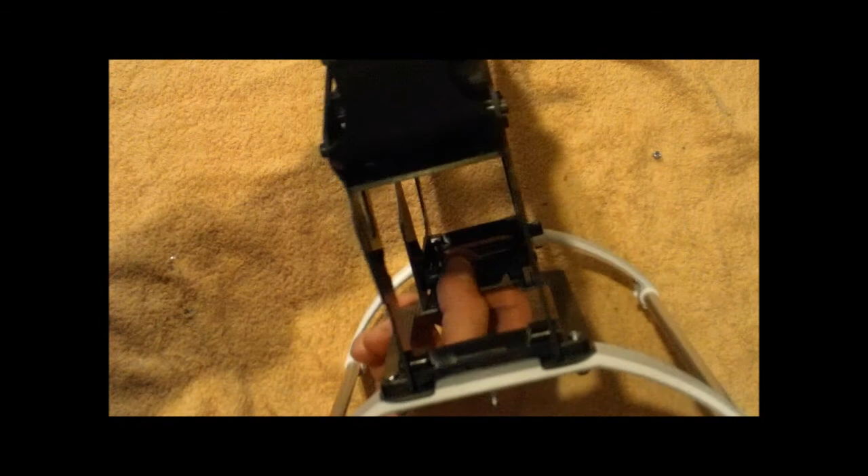Okay, now we've got this middle mount part right here, and there's plenty of room in here to fit the batteries when we have to. This is nice and solid. We follow the manual, and the main part of the frame is just about ready to go.

So the next step, what we're going to do is move on to this step 3 bag here, which actually has your main gear and your auto tail gear. Let's see. Bust out scissors here.

So this looks like it's about ready to go. We're going to make sure we check it and everything is nice and smooth. Make sure that the Loctite is in here the way it's supposed to be, and make sure everything is compliant with the manual. But it looks like this auto rotation main gear setup is already pretty much taken care of.

What we're going to do next is, now we have all of the servo mount hardware right here. So we're going to get this stuff out, and we're going to start mounting the servos.

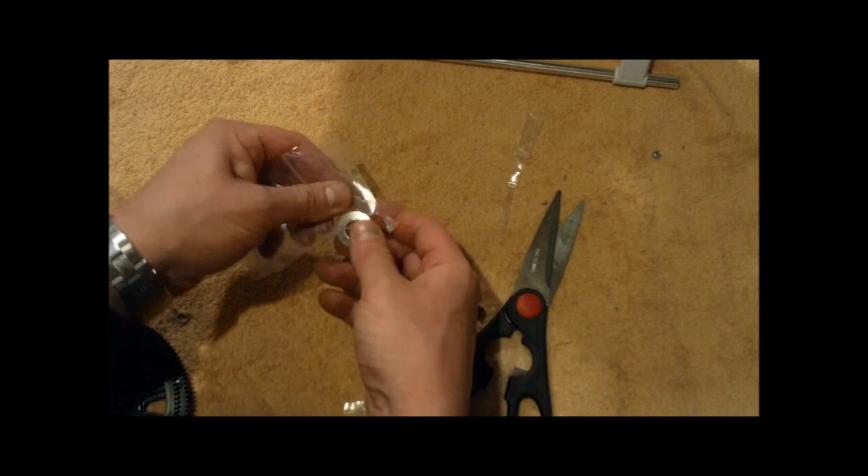This little collar here for the main shaft, we're going to put this to the side. Oddly enough, it's going to go in underneath the top bearing block instead of over the top, like what some of you might be used to. It's going to go underneath, kind of like a Compass helicopter, underneath the bearing. It'll give you more play with the swash plate. Get that handled.

So we're going to take our servos and make sure we just mount them according to the manual. We're going to use the previously mounted servo mounts that are on here, carbon fiber, little front plates, and we're driving into plastics, so we're going to just use a little bit of CA if we want. I'm going to opt out of using CA on these because we're using self-tapping screws. It's pretty good, we want a little bit of shock absorption in the servos. I'm not going to use the little metal inserts that go into the servos, I'm just going to use the little plastic parts that go in there.

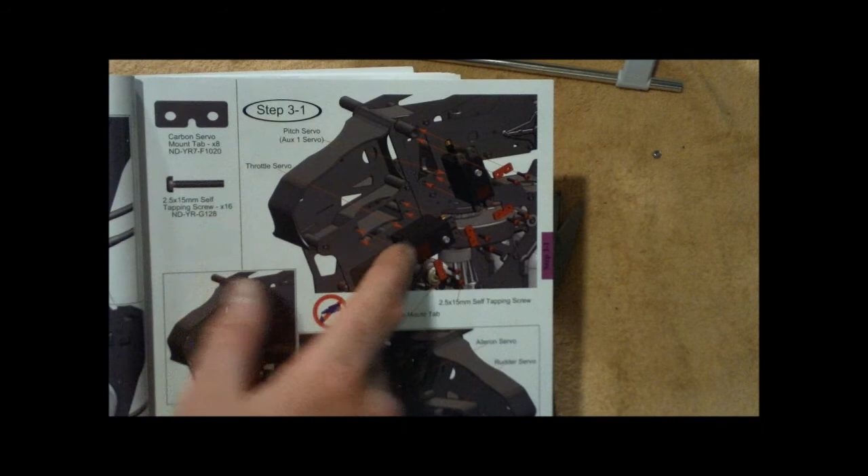We're going to make sure on the left side of the helicopter, both of the cyclic servos are facing upwards, but on the left side, this front servo is going to be facing towards the rear, while on the right side, the tail servo is going to be facing towards the front. So on the right side of the helicopter, we're going to make sure the rotating part of the servo is on the top for the cyclic, and on the front. On the left side, same thing with the cyclic, it's going to be on the top, but it's going to be on the back over here.

Actually, that's just for the nitro, so we're not going to have to worry about this. This is the throttle servo. We've got our elevator going to be back here, two cyclic, and then the tail servo here in the front. If you're running a nitro, this one you're going to want to make sure it's in the back, but we're not doing that.

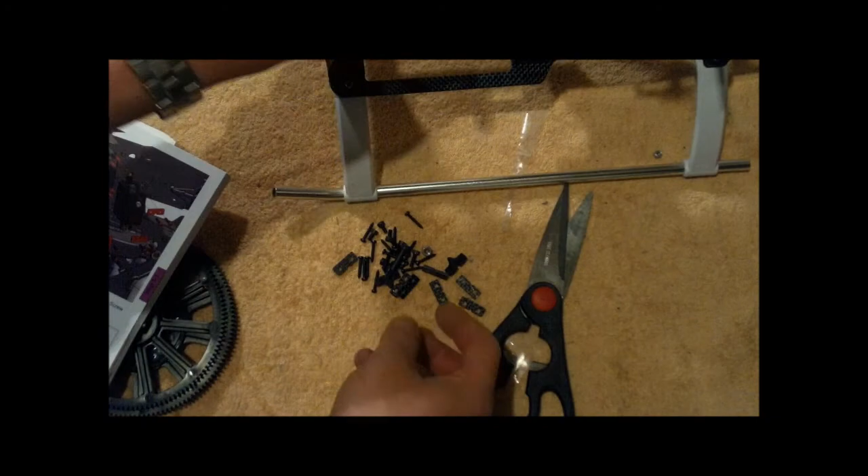We're just going to get those servos mounted here, and then we'll come back and look at those. We want to be geared towards running all the wires towards the front of the helicopter. And if you look at the manual for the elevator servo, we're going to put it back on the right side, and we're going to have the rotating part facing forward. So we'll come back and review once we get all the servos set up, and we'll get to setting up the one-way bearing after that.

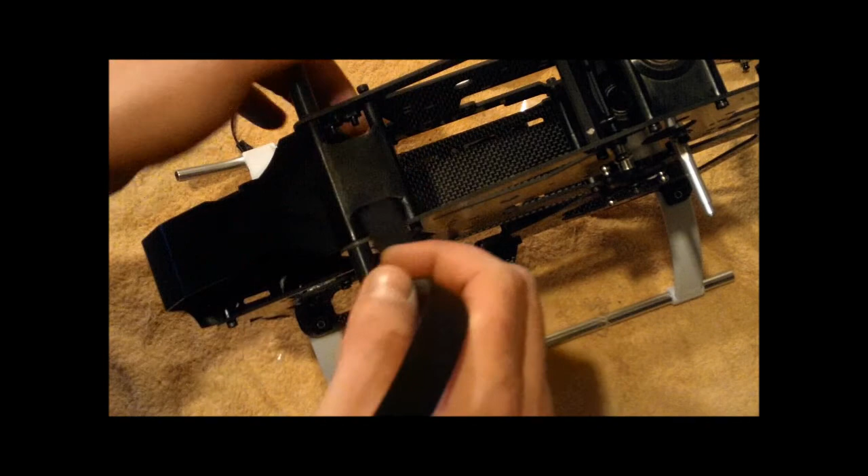Okay, now while we can, one thing we're going to do real quick is use one of the supplied straps and run it through this front part, because eventually when we have to put a gyro or receiver or whatever we're going to put on here, it's going to be a little bit harder to access it once we put the servos on. So we're just going to get this thing pulled back and set up right here so that we can have that set up for when we need it in the future.

Okay, now that we've got the servos mounted in here the way they're supposed to be. On the right side of the frame, again, cyclics are up, tail faces forward. Left side of the frame, there is no throttle servo because we're doing an electric, not a nitro. And the other cyclic is facing up again.

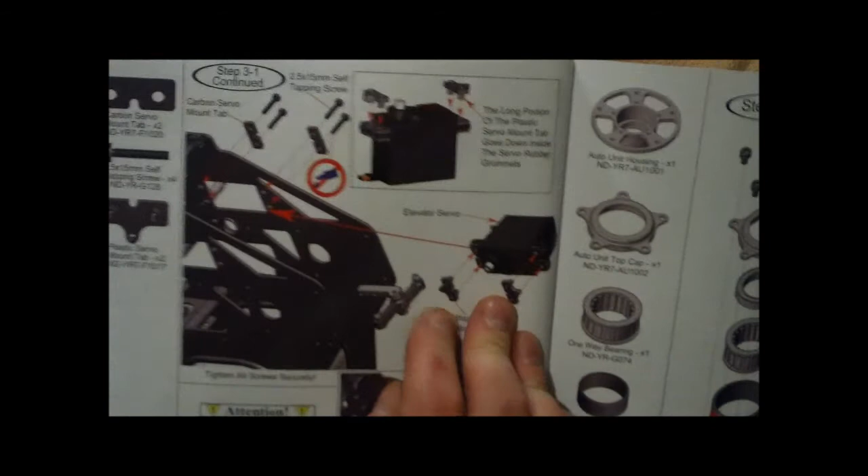For the elevator servo back here, you're going to use the plastic mount. This time the servo comes in from the inside, and you come in with the screws from the outside, but you're screwing into the long part of the plastic, which is going to end up going into the little rubber grommets inside the servo. As you can see here in the manual, it shows the long portion of the plastic servo mount tab goes down inside the servo rubber grommets.

So these little tabs inside the holes, the carbon fiber little frames are going to be coming in from the outside, servos in from the center of the frame, and make sure you have the rotation part facing forward. In the end, it looks like this - a little detailed view of how it's supposed to look.

Next part, I checked the main gear and the auto rotation. Everything was great. There was thread lock in here. All the bearings and everything was in there the way it's supposed to be. This part is ready to go out of the factory.

As they instructed in the manual, take this little Jesus bolt. This is a pretty nice thick little Jesus bolt. You need like a 3mm screw to get it in there, and we're getting this thing all ready to go.

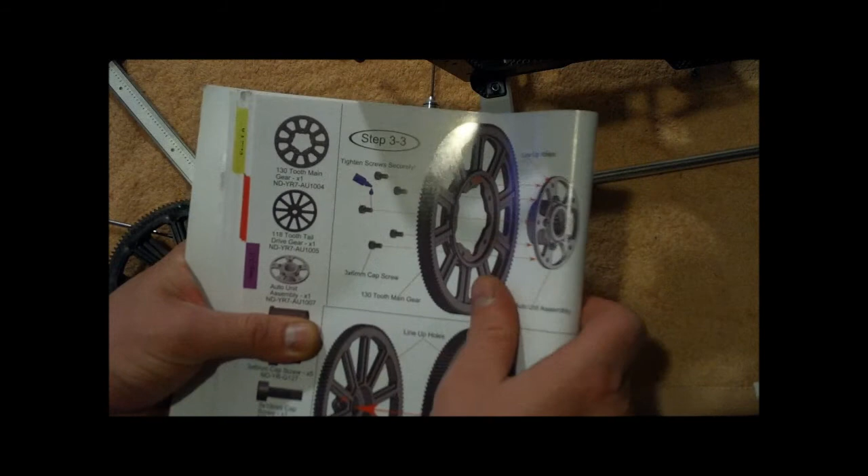Okay, one thing you want to make sure that you do with the main gear is get these 5 screws, the 3x6 cap screws, put into the main gear, and you want to make sure you're coming from the bottom and screwing into the top. You're putting thread lock and you're going through plastic, and then you're going to end metal to metal, so you're putting some blue thread lock on here.

A good way to access it, just the way you have it, you can line up these squares so that you have access to the holes right here. You want to just make sure you line them up, and in the end they're going to just come about flush with the top here, and it all moves nice and smooth.

In the next step, this part was already done by the factory. So we've got it set up like so up here. We're going to get ready to put it in here and put the main shaft down the top. What we're going to have to make sure we do is get the collar ready.

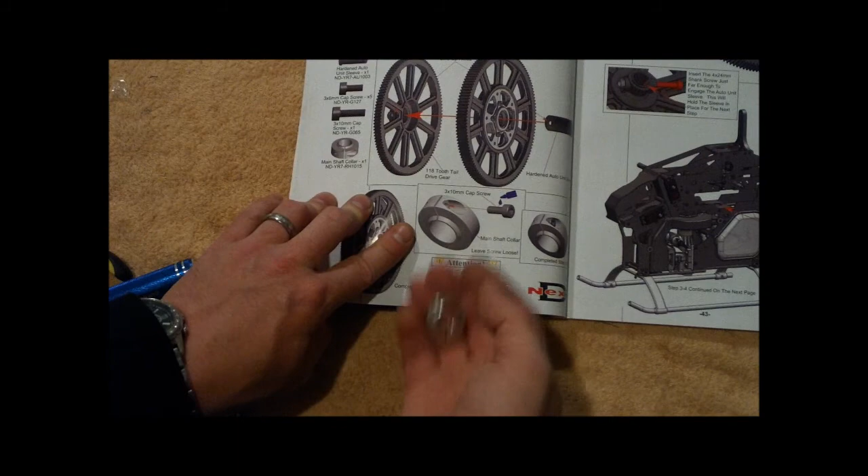Like I said earlier, this collar is going to go in from the bottom and come up from the third bearing, and we're going to make sure we have this 3x10 little cap screw holding that in place. Right now we're just going to leave it loose so we can slide it on the collar, but once we've got it ready, we're going to make sure we secure it here in the frame.

And once it's inside here, there's a little hole. What's great about these little Rave kits is there's holes that you can access everything you need to access. So when we tighten the collar screw, we're going to come in from this hole here. There's also on the main shaft, when you're coming in, there's a hole here, so you bring it with the 2 holes coming in, but then this lines up with this center hole, so you can put a little hex driver through it so it can hold it in place while you screw this bottom part. It's really nice and convenient.

There's even holes here on the elevator arms, see in the frame and the elevator arms, so that you can make sure you can put something in there and hold it in place to make sure that you're measuring everything correctly. So these holes definitely help with getting everything lined up the way you want it to be lined up.

So now that we've got the main gear ready to go and the auto rotation, we're going to put the main shaft in there, and we're going to line up the holes.

We're going to make sure the collar is in here, and the indentation, the raised part of the collar, is going to go up towards the bearing. Usually if there's an indent on something like this, that's going to go towards the bearing. With this kit, it's going to go towards the bearing, so it can only equal the size of the smaller bearing, not the larger bearing, and when it spins around, it spins freely.

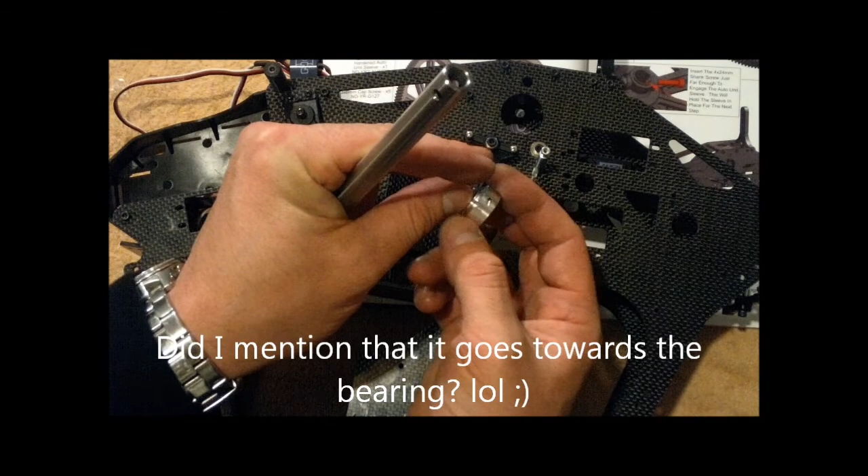So we're going to follow the manual here. Make sure we slide the main shaft down the way it recommends, with the holes facing down. Line up the holes with this hole inside the frame, and then we'll use a hex driver to hold it in place while we screw the Jesus bolt on the bottom.

Then we'll have the main shaft sticking out with the main gear and everything, and it should be all set to go. Make sure you don't forget the collar. This collar goes on the inside. You're going to hold the collar in there, slide the main shaft down through the collar, in through the bottom bearing block.

We'll get the Jesus bolt solidified, then hold the collar up while we're pushing the main shaft down, and tighten it through the hole on the frame. Make sure you look at the recommendations in the manual and do exactly what it says, and you'll be good to go.

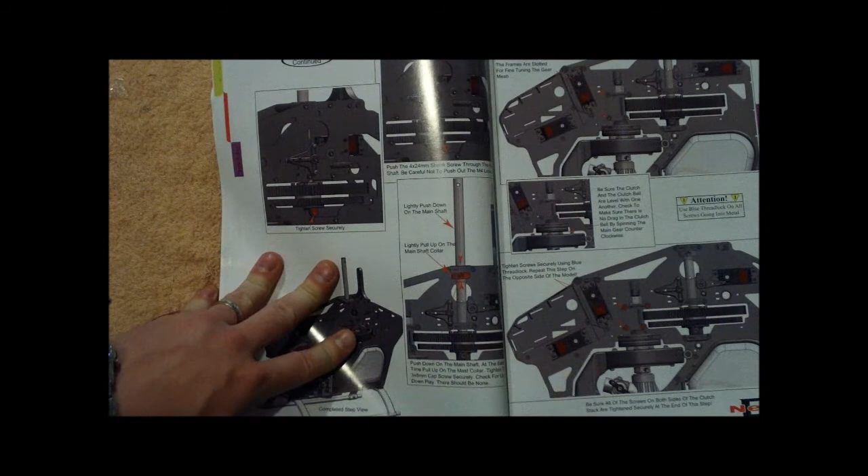Now we're ready to put it into the main frame with the shaft coming through. Make sure again you put the collar in there, and that you're coming through the top third bearing, then the collar, then the second bearing, then through this main gear, and then the final bearing.

Then we're going to screw the Jesus bolt through here, and make sure we can get this little washer nut to stay in place, because when we screw through with the Jesus bolt, we might knock it out of place. So once you get it through a little bit, hold it and then screw it in and get it nice and firm.

Don't over tighten it, and you don't want to warp it. Then you might find there's a little bit of up and down play here. The whole system, once you have it on the shaft, shouldn't be moving up and down, but in the main gear you might find just a little bit of up and down play. That's normal, don't worry about it—it shouldn't be a problem.

See how just that little shaft in there moves just a little bit, but not too bad.

Okay, here we go, finished product. We've got the servos in, we've got the main gear here, and it's moving nice and smooth.

There's a little bit of up and down play here, like I told you, but that's nothing to worry about. We've got the Jesus bolt through. Once we get the Jesus bolt through, we push down on the top. See, what I did was push down here, look from the back, and then with my finger in this hole I held the collar up.

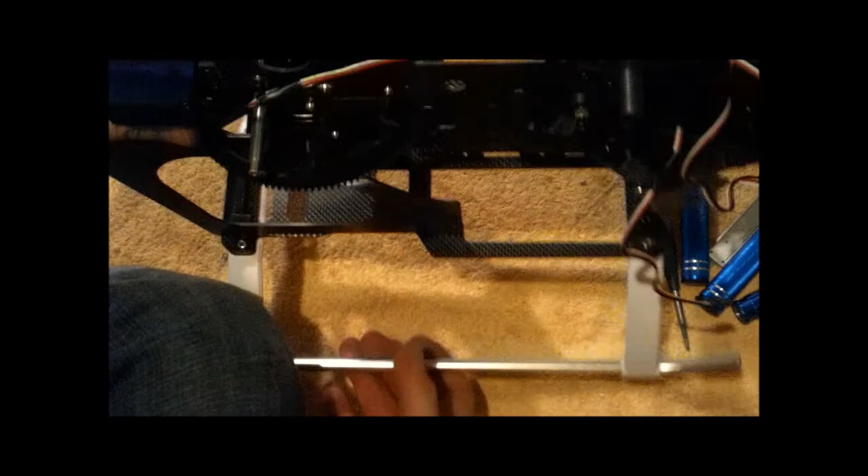So there we go, we've got the main frame with the main shaft and the main gear and all the servos, and we're ready to move on to the next step here on the electric build of the Rave ENV.

Okay, the next step we're going to move on to here is bag—it says step 4. It's got the swash plate, and you can set it up either in the 120 degree CCPM swash plate or the 140. I'm going to use the 120 myself, so make sure you set it up the way it says.

We've got the smaller ball links here on the ends, and then we've got the one here that's got another anti-rotation ball sticking out.

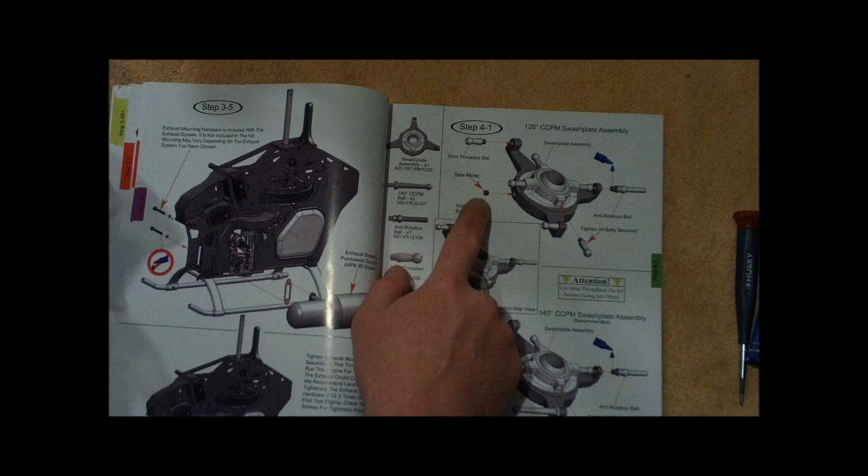There's also these little grub screws that come with the bag. You don't want to tighten them too much. They're meant for if you get a bunch of play in your swash plate or your ball in there, but with a new one you shouldn't have a lot of play. You just get it in there and get it snug. You don't want it too tight, or you'll kill the play or smoothness in the swash plate.

So make sure you follow whichever setup you're going to go with, and remember, read this note about the grub screw, so that you do not fly with the set screw too tight on the swash plate. We're going to go back, put thread lock on these and get the swash plate ready to go, and then we'll come back and show you what we've got.

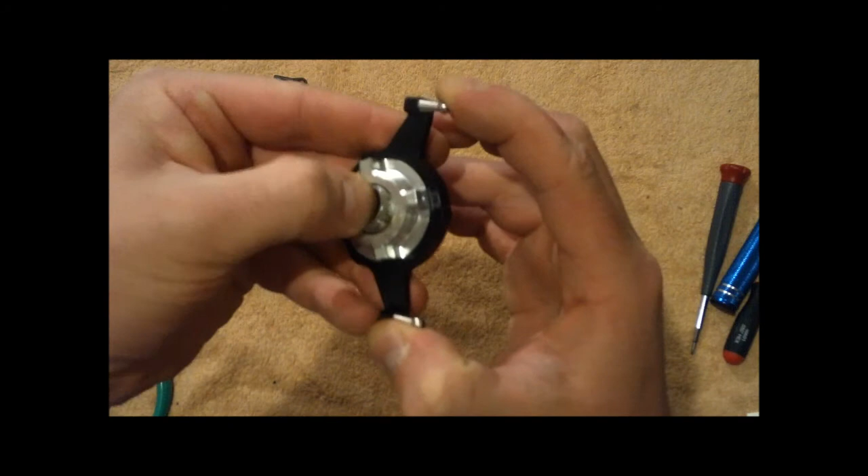Now we've got the swash plate finished and ready to go. Blue thread lock. Got the small ones on there because we're doing the 120 ccpm. I opened up this bearing a little bit and put some extra tri-flow inside there, to make sure it's moving nice and smooth. Grub screws just in there lightly, with a little blue thread lock, and just get them nice and loose. There's no play in here, so there's no reason to tighten them. If you ever tighten them, you're going to get into trouble.

Next thing it says to do in the manual is to get this ball link, this linkage rod, ready to go. I'm going to make sure I follow the directions here and get it so that the gap in between is 48 millimeters and it's 90 millimeters between the holes. I notice there's a right angle turn, and there's a certain way that the ball linkage rods clip onto the ball links. There's a little dot here, as you'll see on the inside of the ball link. You probably can't see this one, but right here, a little raised and embossed dot, and that's going to be the part that goes inside.

So we're going to create this one, measure it to length, and put it on the anti-rotation bracket part of the linkage rod. A good way to get this done is to just thread it in there a little bit, get it started. Your ball link pliers are pretty good for holding it in place. Get the second one on here. These fit on pretty nice. And then this little tool, if you've got it, is a great little thing for helping you put the linkage rods together. So just doing this until I get it to the size that I want it to be, and then I'm going to put it on this as it says in the manual, and then we'll come back and update and put this onto the main shaft and show you what it looks like when we're all set.

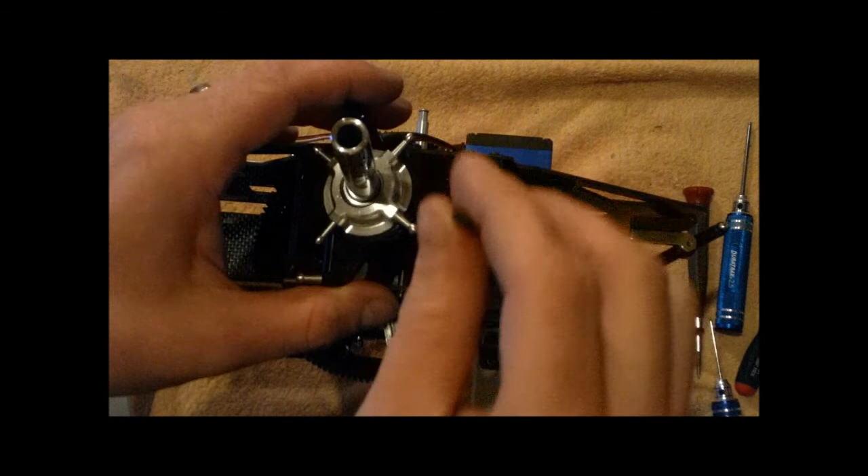Okay, now we have the swash plate done, and we put it in here inside the anti-rotation bracket. We've got this linkage rod measured to size. We're not going to put it in yet because I notice moving up and down here it's a little rough moving inside the anti-rotation bracket. So I'm going to take the bracket off, and I'm going to sand down in here. Make sure you use a nice straight flat sander so that you get it nice and straight. You might be able to just kind of work it up and down to get it to move smooth enough for you, but that's not smooth enough for me.

You don't want to create any play, but you want to sand it enough so it's moving up and down nice and smooth. For mine, towards the top, it's better, but once it gets towards the bottom, it kind of clamps down on there and it snags. So I'm going to take this anti-rotation bracket off here and sand this down a little bit so it's a little smoother. But before we put the swash plate on here, I made sure I lubed up the main shaft, and that moves nice and smooth on there by itself. So we're going to come back after we sand this thing down.

If you do it on the frame, you'll probably get fibers all over. I don't want to do that, so I'm going to just loosen up these screws, pull the whole thing off, and then sand in there. Again, make sure you use a nice straight flat sander and you don't over sand. You just want to make it so that the anti-rotation shaft is moving inside the guide nice and smooth.

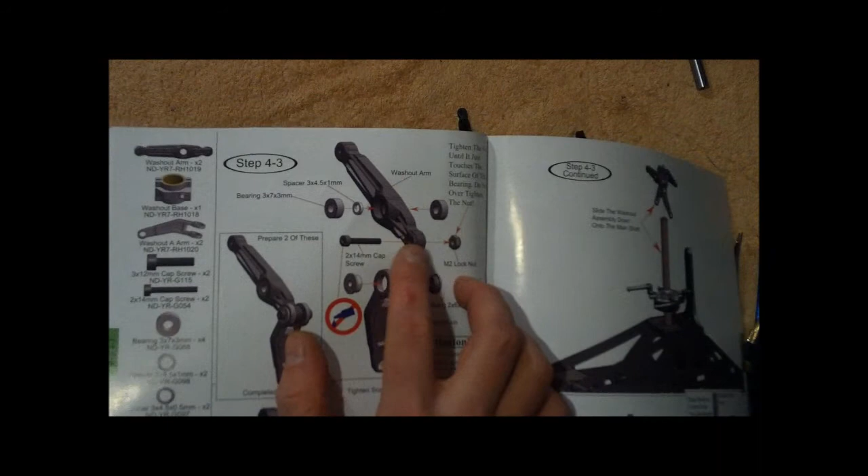So basically what we're doing is this part up here, as you can see, we're going to start putting this bearing into this arm, then the spacer, then the other bearing, then we'll have that one ready to go, and then we'll put the flanges on this little part, and then put that on here, and then start screwing this 2x14 millimeter screw in here, and then we're going to tighten it into this nut right here. But we don't want to over tighten it. We just want to tighten it until it's just about flush and that everything is moving nice and smooth. And it's going into one of the nuts where you don't need to secure it with thread lock, so no thread lock in this.

In the end, we want it to look just like this. I say just line everything up the way it looks here, and just set it up with the same perspective as it is in the manual. So you'll see there's like a flat side here in the manual. You see the left side, which is this part, longer edge out, shorter edge from the center here.

Gonna do just like it says. Put the bearing in there, then get the spacer worked in there. Make sure it's in there properly. And then this other bearing. That part's set.

Put the little flange bearings on this, and then just like in the manual, this part's going to be dipping down to the right while this is faced up this way. Put it on here, and we're going to screw it on with the nut, and in the end you want to make sure it's moving nice and smooth. You're going to end up putting together 2 of these.

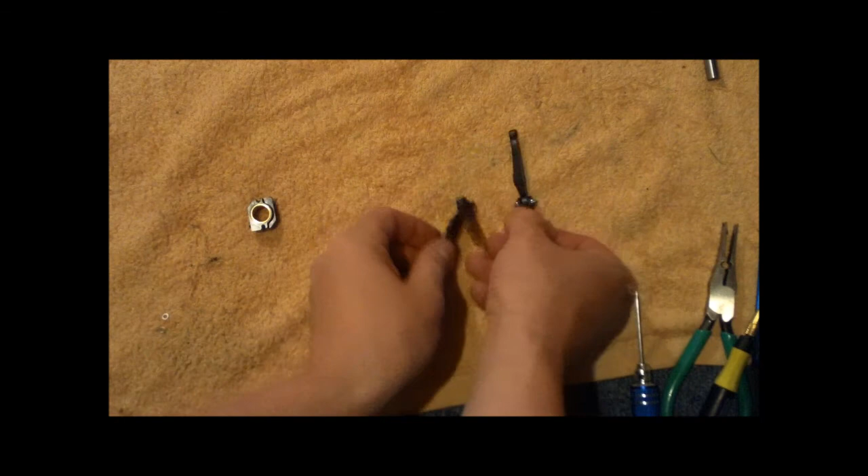Okay, moving on, now that we have both of these mixing arms ready to go, and they're moving nice and smooth, just the way we want, didn't over tighten that, we're going to grab the washout base here. If you're having a hard time finding it, my washout base was actually already on the head unit here.

Pull that off there. You'll notice this thing isn't symmetrical. At first glance it may look like it, but there's actually one spot where there's more space here than there is up at the top. So the more length is actually on the bottom.

What you want to do is, just like previously, line it up just the same way it looks in the manual. Have this facing here, and then the mixing arm is going to be facing just the way you set it up. There's also this little spacer, don't forget it, the 3 by 4.5 by 0.5. There were 4 of them in my kit, so make sure you grab that, and the 3 by 12 cap screw, and you're going to use thread lock because you're going metal into metal.

So we've got our screws and our little spacers. We're going to hold it right here like this, and make sure the length of your part is on the bottom. Thread lock on the end of this, make sure you don't get any thread lock in the bearings, just get it in the threads nice and smooth, then through the spacer, through the mixing arm, and into the washout base. Do that on both sides, and then we'll come back and put the washout base onto the frame.

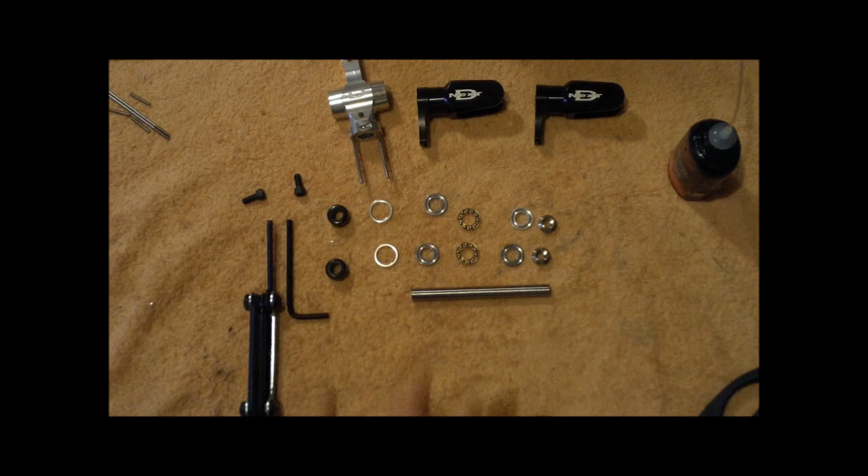Okay, moving on to the next part, we're going to start building the head block and this whole setup. You're going to need a couple of really big 5mm hex wrenches, and then pull out these 2 big thick 5 by I believe 12mm screws, your head block, your 2 head grips, and all your thrust bearings, dampeners.

What you want to make sure you do, I just like to line it up in the order that it's going to be going in there. We've got here the dampeners. These are going to go inside the head block, and you want to make sure that the part that goes inside is the part that doesn't have the embossed raised edge, because there's one side that's a little bit raised, and then the other side isn't. You want to make sure the raised part is facing the outside, just like it says here in the manual.

So we've got the dampener, we've got this large inner diameter little washer, and what you want to do is with these ball races, there's going to be 2 of them that have a larger inner diameter. You can see when you put it on the feathering shaft that there's a lot more play. That one's going to go on the inside, okay?

And then this other one with the smaller inner diameter, you can see when you put it on here, there's barely any play at all. That one goes towards the outside. So larger inner diameter is going to go on the inside. Make sure the curved part, the ball race, is facing the outside towards where the bearings are.

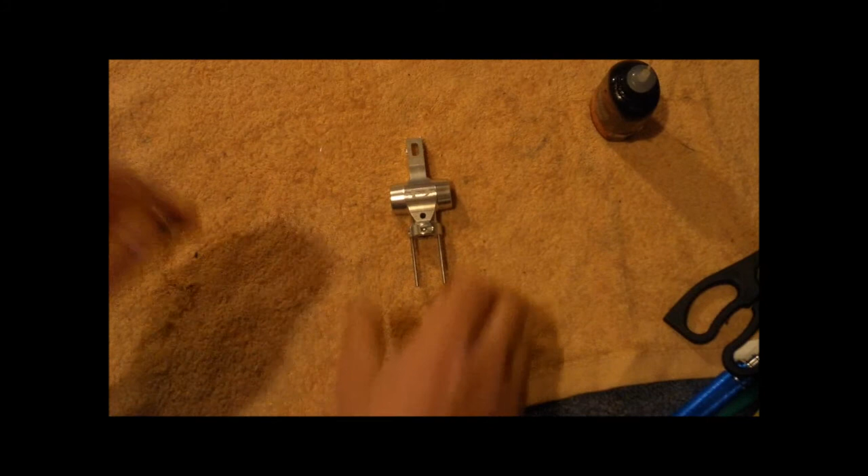Another little tip on the head block, just make sure you put the dampeners in there first. I tried kind of lining it up and then putting it in as I'd put the heads in, but they weren't going in the way they should, so just get the dampeners in there nice and tight first. Make sure that it's flush, and again, make sure that the grommet part that sticks out is towards the outside.

And there's also this little washer here that you're going to want to make sure that you put between the dampener and the grips. So once you've got one side ready to go, just make sure you put the dampener on, or this spacer in here, and then put a little tri-flow on the end when you run it in. Run this end through. It's going to take a second here.

See, this is going to come through. The dampener on the other side is going to probably want to come out, so make sure you push this down, get it all the way through, then push the dampener down, and make sure you get this other little spacer on before you start putting the second head grip on the head.

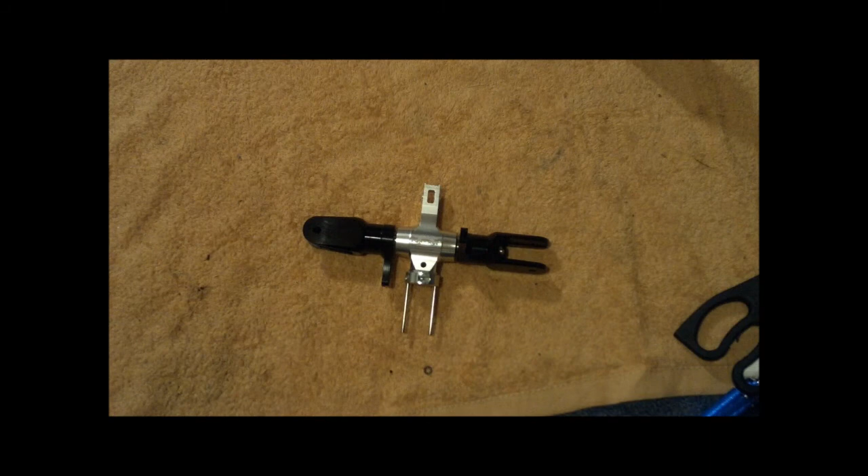We cranked in both sides really tight, and we want to make sure we don't forget the bearing in here in between the grips, the washer spacer in between the grips, the bearings inside here, the large inner diameter ball races, and then the little step washer here, and the 5mm hex screw. Just make sure you're following exactly what it says here, and you've got the correct order.

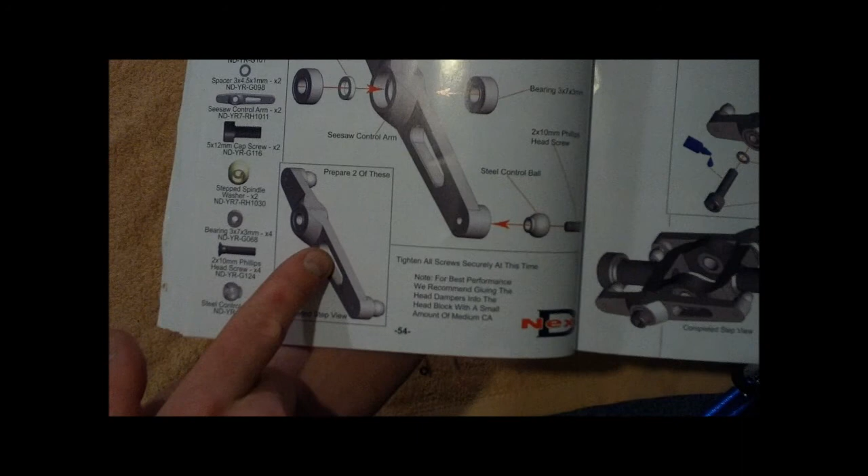So now we're going to move on to the metal mixing arms. We're going to get these set up. There's another one of these little spacers here that we're going to put in with the bearings, short arm, longer arm. We're going to make sure that we screw the balls on the part that is protruding, because there's one side that's flat and one side that has the protruding parts, and get this thing ready so we can start getting the flybar and all that stuff ready to go.

Okay, for this flybar seesaw assembly, this part is already pretty much done for you. It's already set up, most of this page 54 and 55 is done. I checked, this has thread lock. I pulled mine out, put some more thread lock on them, but out of the factory they're already ready to go. The washer, the spacer, the washer, all the bearings were in place the way they were supposed to be. All I really had to do was put on the balls for the ball links.

So I just make sure I put those on the correct side, open this up, make sure they're facing towards the inside, and the rest of it is already ready to go, nice and smooth, and the seesaw is all set. So we're going to move on to the next step in the manual.

Okay, next step here, we're going to put this seesaw for the flybar onto the head block. We're going to make sure we line it up the way it is looking here. I'm not going to put these blade screws in here yet, I'm going to just put those to the side. I don't really need to put those in there yet.

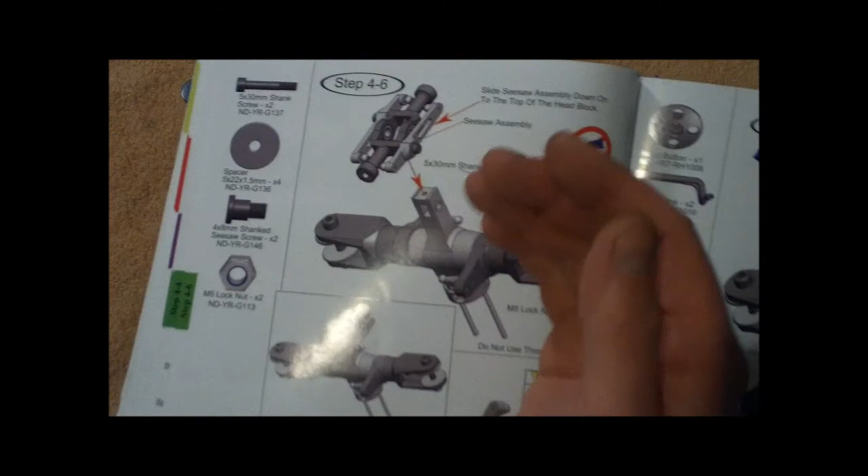We're going to make sure, see how we've got the shorter part of the arm down here, longer part out here, and it's the side where the screw-in is towards you. The rest of it's basically symmetrical, so which side is on top doesn't really matter.

We're going to pull out these two little screws here, these shank seesaw screws, and we're going to apply red thread lock onto those, the really tight type 22 stuff. So make sure we get out these two screws here, and you've got your type 22, and we're going to put that on there.

Make sure when you set it up, just make it look the way it looks in the manual, and put the seesaw on here, line up the holes, and then run these in. You're going to end up screwing these into these little tapped metal pieces right here, and that's going to be on there nice and tight, it's not going anywhere. Just make sure you don't get any of the thread lock inside any of the bearings you're going to be screwing into. So we'll come back and look at that once we've got the seesaw on the head.

Okay, now we've got the seesaw on there. It's again moving nice and smooth. Everything's nice and smooth the way you want it.

Last part for the head is to get the button head on here. I've got a 3x8 screw that's thread locked and ready to go, since we're going metal into metal, and it only fits one way. Make sure you line it up instead of trying to tighten it at an angle, or it will be difficult. It's keyed, so it only goes on one way. Then we'll screw that on the top and start moving on to the rest of the Flybar setup.

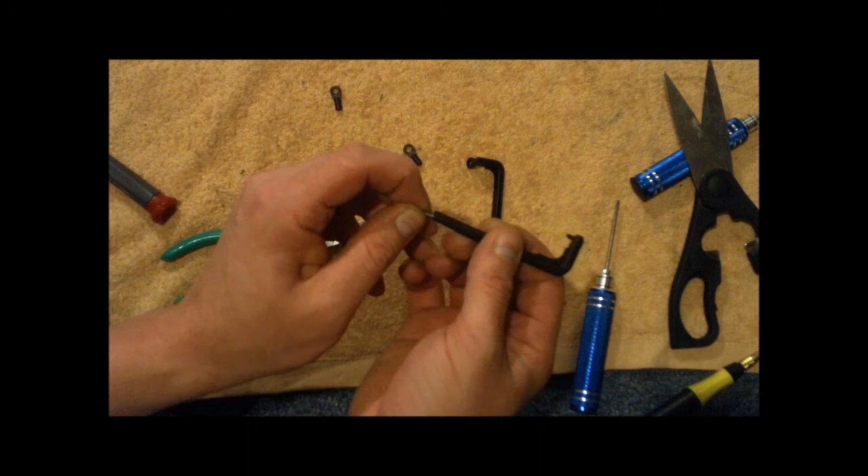Now for the next part we're going to put together these Flybar links. You have to be extra careful here, taking it easy and doing it correctly. It's going to be a bit of a pain getting this little screw inside here - there's a little hole in there. Most of it plays around, but you have to line it up with the hole and put on a lot of pressure to push it on there. Make sure you get this all the way to the bottom of this part first before putting on the small ball link on the end.

If you try to put it on the link and then screw it on, chances are you'll screw too far into the link and break it. So make sure you don't do that. Screw all the way in here. What I did was use the ball link pliers, hold the little end part on there, and push and twist until it finally went on.

By the time you have it ready for the small ball link, just a little bit of thread should be sticking out the top. That's how you want it. Then start screwing it in there, and the end of the ball link will start screwing inside here. Make sure you get this all the way in before putting the ball link on, or you'll ruin the ball link.

Bring out your calipers and make sure the whole thing is 90 millimeters, or 81.5 between the center holes of the ball links. Make sure it's facing the right direction. Then we're just going to put a steel control ball on here so later we can screw it onto the rest of the head assembly. We'll come back once we've got these Flybar arms ready to go.

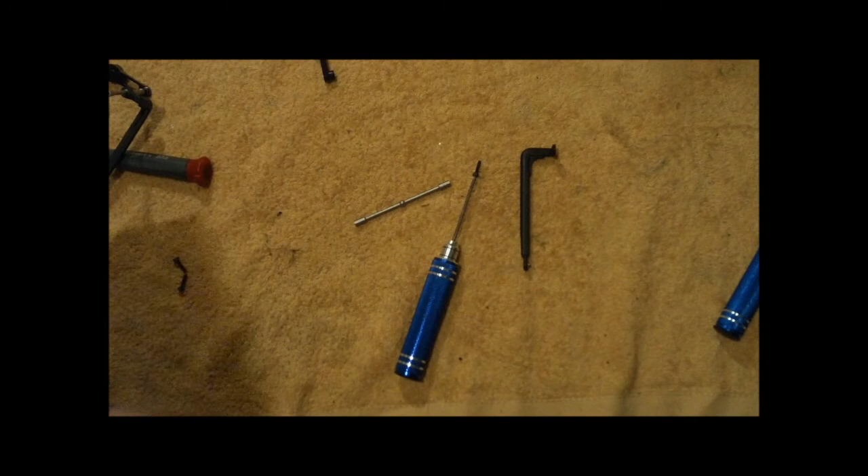Okay, next step, we're going to get these Flybar link assemblies and the Flybar cage balls all set up to put together the Flybar cage. We're going to put the Flybar links on, making sure the protruding part of the L goes in a certain direction - there are little fibers on the back part, and the front part is the way you slide it onto the Flybar cage ball rod. Make sure you slide it on correctly, like this, and then we'll start screwing in the other parts of the cage with these 2.5 by 10 screws.

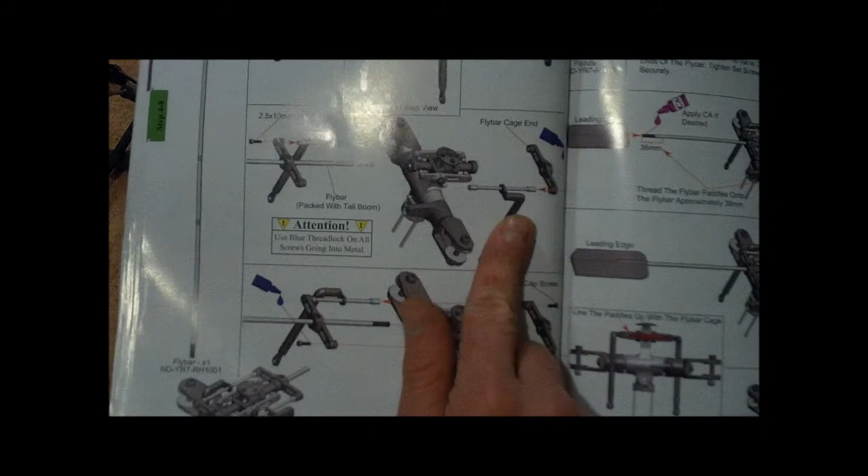It's actually a 2.5 millimeter by 10. I think 2 millimeters is the hex driver that you're using to screw in here. And we're going to make this little L part right here. Once we make the little L and we've got it all set up correctly, we're going to make a second L, and then we're going to put them together with the Flybar and use the Flybar to guide it on, and then put the whole Flybar cage together.

So you want to make sure that you slide these on the correct way. This part coming in, just gonna get through this part here, and then you just want to snap it on here. This actually becomes a little bit easier. You can use your ball link pliers, and you can just snap it on here like this.

Okay, so once that's snapped on, you've got that looking good. And then you've got this part here. I've got this screw already pre-thread locked. You're going metal into metal, so again, put thread lock in it. Put that in here, and we're going to screw it into the side that has the link towards it.

So back here, we're just going to make this little L shape, and then once we screw that on there, we're going to have this full L, and then we're going to make a second one and start putting them in the Flybar cage. So I'm going to get this one done, finish up the second L, and get the rest of it ready to put on the head block. And make sure that you don't forget to use the thread lock in here.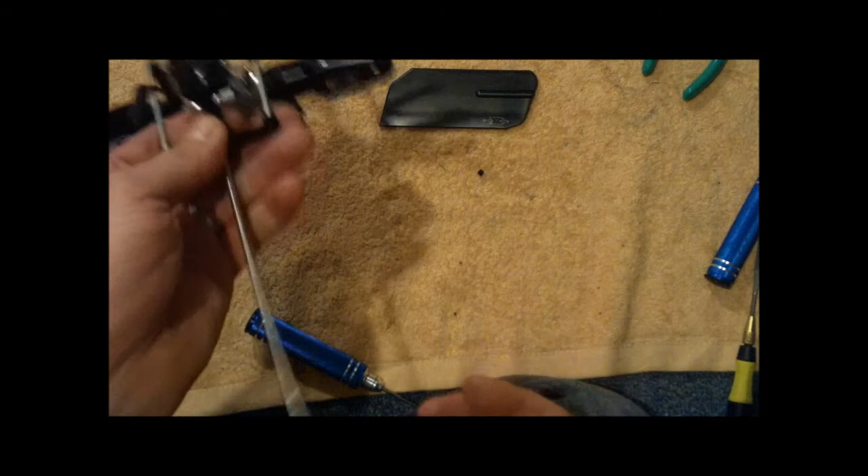And then once you've got the grub screws on and it's nice and tight, you start putting the Flybar paddles on. I made sure on the end, I just went and measured out 38 millimeters, and we're going to put the Flybar paddle onto the rod about that far. So I put just a little mark. You can put tape on there and then take that off, or if you don't mind putting a little mark on there. And as I started threading it in, I'm going to put a little bit of CA just on the last couple threads.

And then tighten that whole thing, and then make sure that the distance here is equal to the distance here. They have to be equal, and then you want to measure them out so that they're level with the cage. So we'll put the second Flybar on here and measure everything out, make sure it's level with the cage, and then come back and update and show you how everything looks when it's about ready to go onto the frame.

Now we've got the flybar paddles on here as we wanted them. This measures exactly the same length as on the other side, and you can use a pitch gauge if you need assistance, but you just want to make sure the paddle ends up level with the cage on both sides. The leading edge is going to go clockwise, so make sure the leading edge is facing the correct direction. Just make sure it matches up with what it says in the manual. So this is all good.

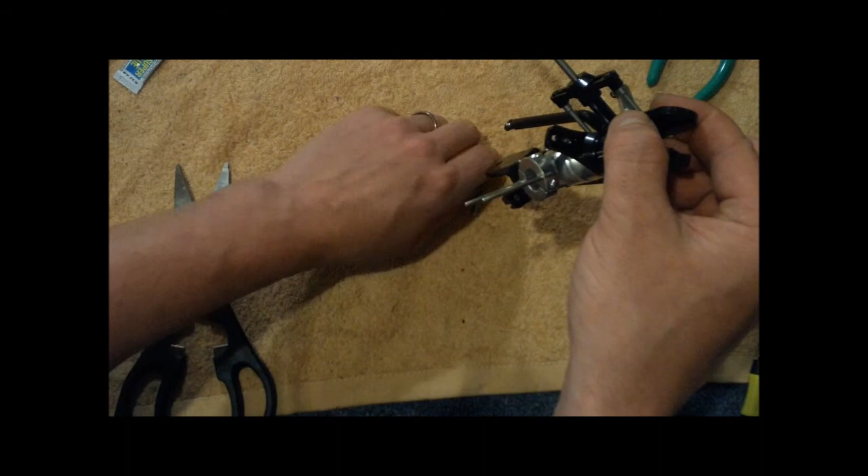One little thing about these grip ball links: it doesn't screw directly into the grip like it looks like in the manual. It's actually these little black nuts that come with the whole kit. You're going to screw it in here, and slide the nut in - there's a little slot on the grip. Slide the nut in there and pull that back. Make sure you put thread lock on there, then twist it in, and use some needle nose pliers or something to tighten it, and you'll have it all set.

Now we're going to put the head onto the main frame part. First we got to make sure we've got our Jesus bolt, and our little 3x10s that we're going to use to put on the collar - that will go on these parts. The Jesus bolt's going to come through here, and then we've got these little 2x10 millimeter screws with M2 washers. We're going to use those to put these little flybar ball links onto the mixing arms. So first we want to make sure we line up the holes.

We got the hole here on the head block, and we're going to line that up with the hole on the main shaft. Then we're going to take our Jesus bolt, put it through here - I'm just going to lift it a little, put it through - and we've got one of these nice little plastic washers, so we don't need any thread lock. We're going to put that in there. Right now I'm just going to finger tighten it. When I cut, I'm going to tighten that a little more with a wrench and get it hand tight.

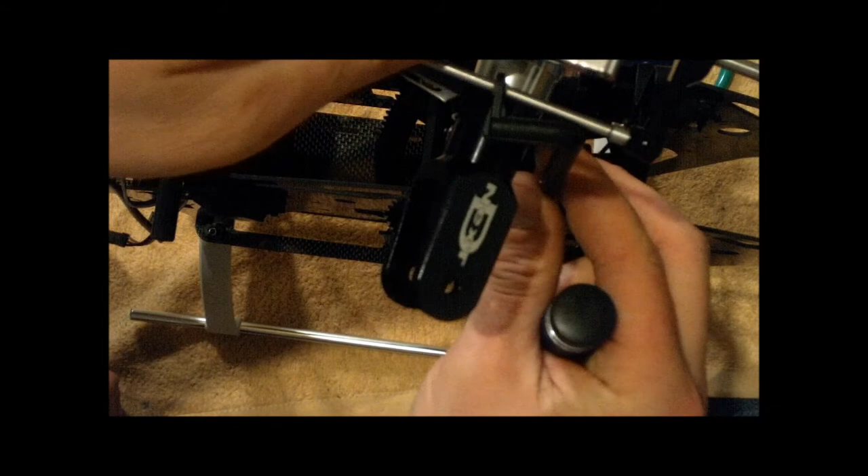I'm not going to do that right now. It's long enough, you don't want to over tighten it. You want to make sure you get it nice and snug. Don't over tighten anything into plastic, or it'll be too much. Then do the same thing on the second arm, or ball link arm, for the seesaw cage. Once we've got those tightened, we can come in here and tighten the Jesus bolt, and then tighten those.

3x10mm screws that are going into the collar of the head block. We'll come and review after we've got those parts finished up. So there we have it - the head block is now securely fastened onto the rest of the head and the frame.

The phasing pins and the washout base are matching up perfectly. The swash plate moves smooth through the whole thing. All the grips move smooth.

We've got this last little bit - these collar screws in here. Make sure you tighten them evenly, kind of go to one, tighten a little bit, other one, tighten a little, go back and forth, make sure they're tightened nice and evenly. Jesus bolt is in here and screwed in, and the head is ready to go. Now we can start moving on to the tail, and we'll get the ball links finished up for the head a little bit later.

Okay, now the next section we're going to move on to is step 5. We're going to start putting the tail components together. So we're going to want to open this bag, get everything out, and let's open it up here and show you what all is inside.

Looks like we've got just about everything we need, and some of the stuff looks like it's already pre-done. So far everything that's been pre-done in the factory has been thread locked and perfect the way it should be. Here we've got zip ties, the frame brace, and the guides for the push rod. The tail block looks like that's already got the torque tube in it the way it should be. Stabilizer mount, the fin, blades, back torque tubes, all the gearing, tail pitch slider, control arm, the tail shaft and hub.

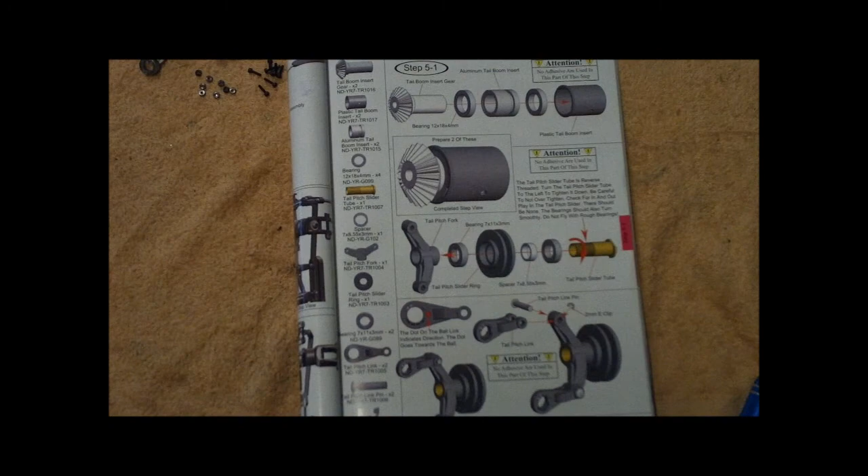Okay, now that we're moving on to setting up the tail, step 5 - over here, step 5.1, this whole page is already done for you out of the factory. These guys are already ready to go, they've got all the bearings and spacers and everything's in there the way it should be. Same with down here - they put together the tail pitch slider and everything you need, and it's all set to go out of the factory. It's got the thread lock where it needs it. Got this tail pitch slider all ready.

Gonna put that to the side, and we also have the torque tube components. Looks like these are symmetrical, so the one that goes in the front is the same as the one that goes in the back. So we're going to put that to the side. What we have here lined up is the rear tail hub and all of the different bearings and spacers and washers and nuts and bolts that we're going to be using to set this up.

The way we do this one is we're going to put everything on here on the end of the hub, and then put the nut on the end, and then take the grips and clamp them onto that whole assembly, and then screw those together. It's going to be like a little sandwich thing.

So here on the next page you can see it says all the details, just like on the main blade grip, except this time the bearings aren't preloaded into any grips. So you've got the bearing - make sure you've got the right spacer here, it's a little thicker than all the other ones, so it's easy to tell apart. 1 millimeter, it's like 7 by 10 by 1. Make sure you've got all the correct diameters - the larger inner diameter is the one that's going to go towards the inside.

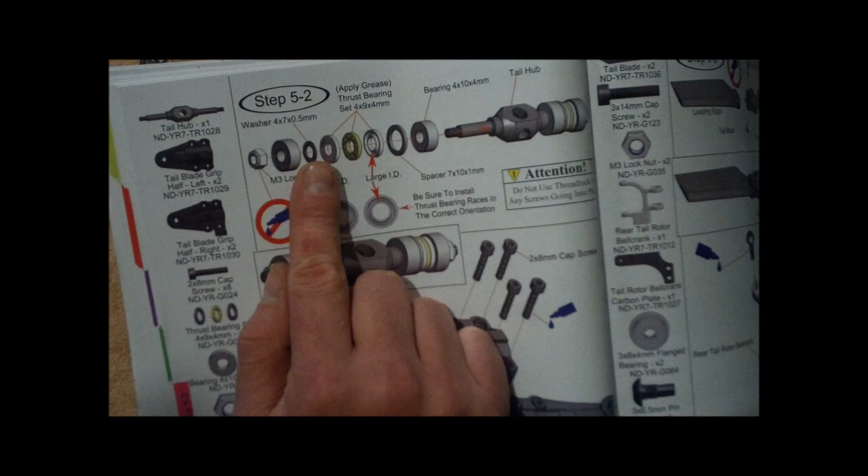Remember, just like we did with the main blade grip, put it on here and you'll see it's loose, where the one with the smaller inner diameter won't be as loose on the hub. So we've got the bearing, spacer, larger inner diameter. We're going to pack the bearings here with grease, small inner diameter, and then make sure you get the right washer here, the 4 by 7 by 0.5. There's a couple washers that look like they may be similar, so get out your calipers and measure the inner and outer diameter - make sure you've got the 4 by 7 and it's 0.5. Then a bearing, and then the washer.

So we've got 1, 2, 3, 4, 5, 6, 7, 8 components. Got it lined up here - 1, 2, 3, 4, 5, 6, 7, 8. So what I'm going to do is pack this bearing, double check, make sure that this is the one that's going to be going inside. See how it's a little bit loose?

This one is going to be towards the outside. See how it's not loose at all? And then again, the open face of the bearing is going to go towards the inside of the hub, because we're going to pack it with grease and we don't want the grease to fly out.

These nuts have got plastic in them, so you don't have to actually use any thread lock. We're going to get that set up, and then we'll come and put the blade grips on there.

Now we have this tail hub all set up and ready to go with all the bearings on it, everything's nice and smooth. We're going to separate. We've got these plastic blade grips, 8 little 2 by 8 millimeter screws, a bunch of these little black anodized hex bolts, 2 more ball links and 2 more little screws to get the ball links on here.

So what we're going to do is, you'll see 2 of them have little ends and 2 of them don't. Make sure you don't put the 2 with the same ends together. Basically you're just going to sandwich these together like so, and one side you can see holds the hex nuts, and then you put the hex nuts in there. Put some thread lock on here because they don't have plastic on them, so it's metal into metal. Thread lock on the bolts, and then all the way around.

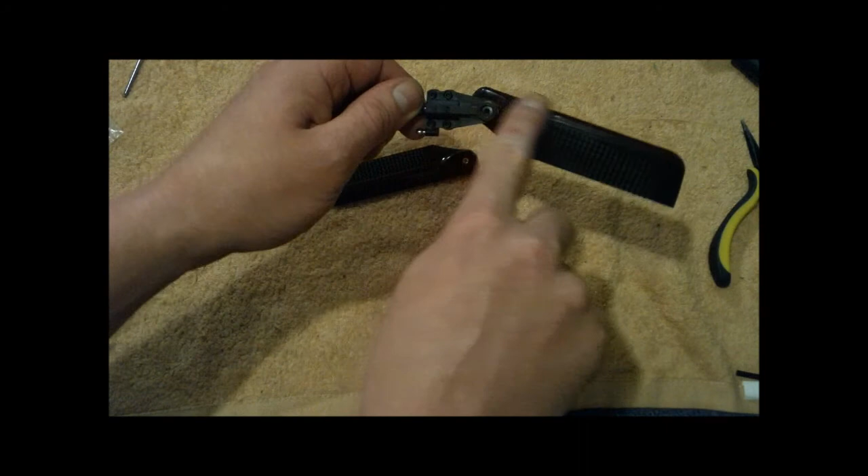Next we're going to put the blades on. Make sure that the leading edge of the blades is going to go on the side that's opposite of the ball links. So it's going to be facing this way, not this way. It's going to be spinning counterclockwise, so make sure the leading edge is going forward, and that the ball links will be following the leading edge, just like it says in the books.

So pull out these longer 3x14 screws and the M3 nuts. Again, you don't have to use thread lock on these ones because it's got the little plastic in there. Put the blade grips on there, and then you've got that whole section set up and ready to go.

Alright, next part we're going to move on to now is getting this little tail bell crank assembly put together. So make sure we pull out this part, the little carbon fiber tail rotor bell crank plate, and these flange bearings would already be in this little setup. This was screwed to something, but take it off what it's on. You're going to have to do that to put it together anyways.

These little pin screws here, there's going to be 2 of those. Make sure you get a couple of 3x8 cap screws. That's going to go in here and screw it together, and in the end it's going to look like this.

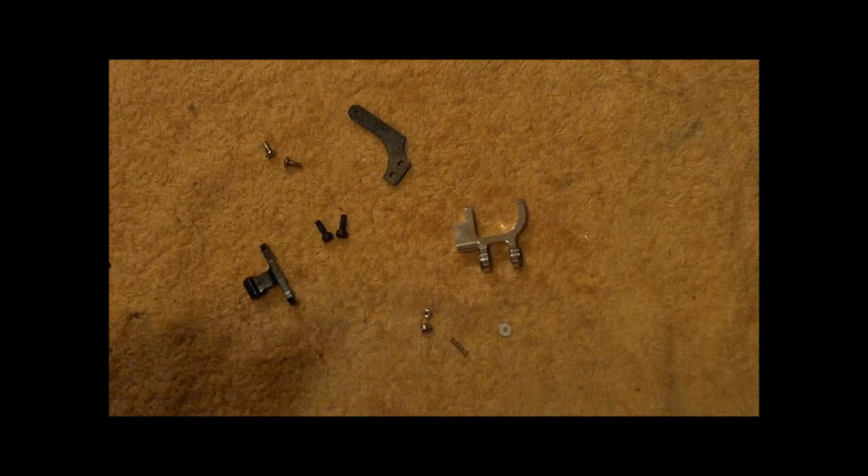So here you can see we've got all the little pieces that we need. We're going to have this little linkage ball here on the bottom, so make sure you set that up correctly. It's going to come through. We've got the hex nut. There's going to be the washer on the inside of that part, and the screw is going to go through there. So make sure you've got the hex nut, the ball link, the screw, and the washer.

This part was on it, and we removed it. We'll put that on there later. We've got this little carbon fiber arm, and these little 3x8 screws.

Anytime you're going into metal, make sure you use thread lock, and thread lock also on these little pin screws. The pin screws go in the top, and the carbon fiber plate comes down here. Just align it the same way that it's set up in the manual, like so, and then screw that together, and then put together the ball on the end there. We'll come back and update once we've got that part finished.

Okay, we've got this little tail bell crank all done and ready to go. We've got these pins sticking out here, got the ball on the end there. There's the washer in there, thread locked onto the nuts, and these guys in here holding it together.

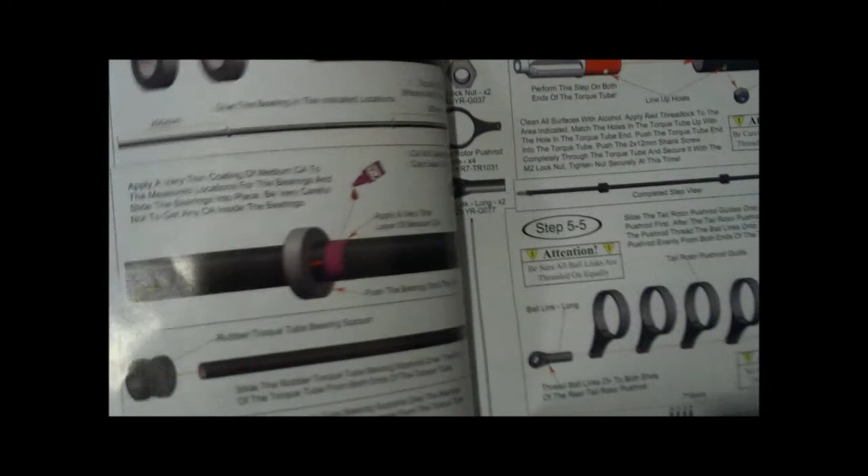Let's see here. So yes, we already did the 200 millimeters, 250. Use glue, apply a thin layer of CA to get those on here.

Then we're going to put these little rubber torque tube bearing supports. Just push those over here, and you might need to use some grease on the outside when you're putting it into the torque tube, but you should be able to slide it over the bearing without any problems. If you need to use grease, that's fine too.

Over here, use red thread lock on this whole thing, on the inside. We don't want it moving. Slide it in here, line up the holes, make sure you use the 2x12 shank screw and the M2 lock nut, and get it in there. You want to tighten it nice and securely, but you don't want to over tighten this. You can cause a lot of problems.

If you over tighten this, you can end up seeing a broken torque tube during your flight later on, and you don't want that. So we're going to put these on here, and again, make sure you use red thread lock and that you don't over tighten these too much.

Okay, so now we've got the torque tube ready to go inside the tail boom. The easiest way to do this is to put the glue on, put the bearing on from one side, we'll say here from left to right, and then put the rubber bearing support on after that, and make sure you come in from the same direction that you came towards the glue. If you come the opposite direction, you can probably end up breaking loose from the CA glue.

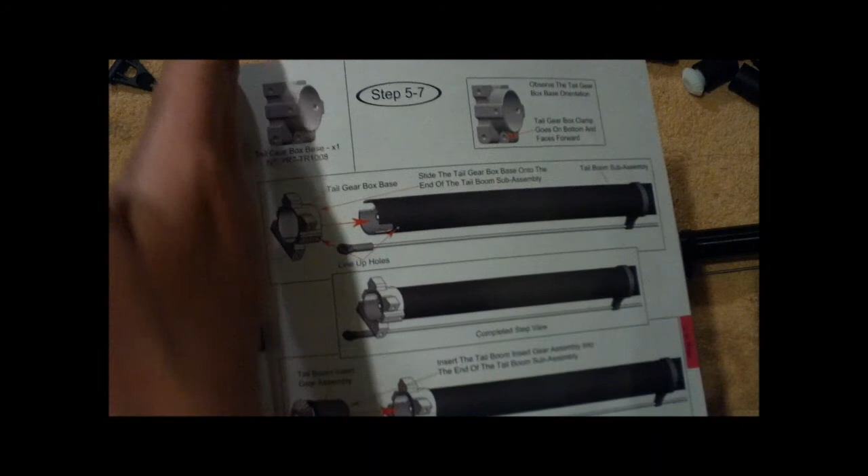Next thing it asks you to do is put this little unit on here. The protruding part faces towards the boom. This is what we're putting together, the tail gear base, which is the rear of the helicopter, and then we're going to put this little torque tube gear assembly inside here, and then we'll come out with this at the end and come back and update again and start building the fin and the rest of the tail gear box.

Okay, here's what we've got now. Tail boom has this gear in it. Make sure that when you put all this stuff together, you're lining up the holes, of course. Move that in place. And this one only really goes in there one way, so when you push it in there all the way, the holes will be lined up.

And this is, I ended up just pushing the torque tube into this so it's moving along with that. Next we're going to take the other part of the tail gear with the tail shaft and follow the next part of the instructions.

Flange bearing is already in the tail fin here, so we're going to push this in here and use a 3x8 to hold this little tail gear spacer, and then we'll end up with this little part that has these 2 parts screwed into it, and then we're going to use a couple 3x8 screws to screw it onto. We're going to have to come in from the left side and screw it onto the back.

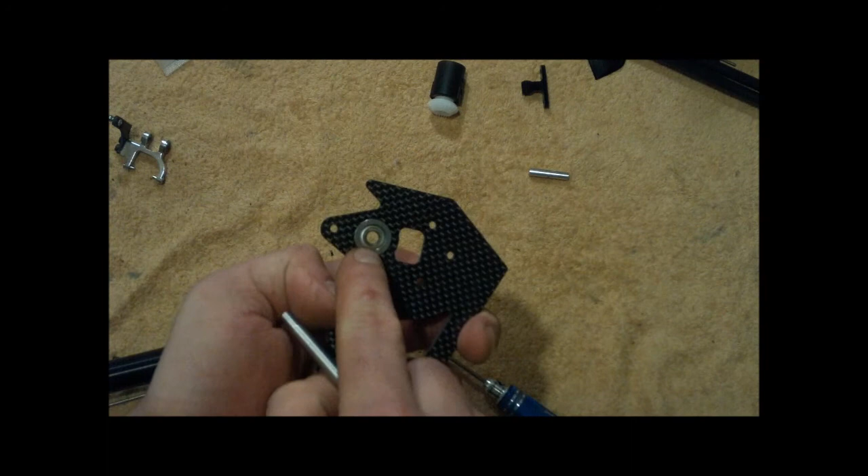So just like it says in here, wrong side. The larger side, see the larger diameter flange here, smaller we're going to come in from that side.

And with this, we've got this little part coming here with the 3x8. Screw this in here. And then once we've got this whole thing put together, we're going to come in the side of this.

Make sure you've got the correct side. I actually had the wrong side, so I'm going to move this little part so I've got it correct. Line it up with the holes.

Alright, so once it's lined up with the holes, we're going to come in, make sure the gear mesh is straight. What we're going to do here is make sure the mesh is straight, and in the end, if it's not, we can go back. There's a couple shims provided in the kit that we can put in the back here or on other sides if we have to. But right now it looks like the mesh is going to be okay, but we're going to follow along and then we'll come back and show the next step once we've got this stuff set up on the tail.

Okay, now I've got this thing together and I've got these bolts fairly tight, not completely, but tight enough. I haven't hand cranked them all the way, but enough to know that that's not where it's moving. And now I'm checking right here, and there's a little bit of extra play in the gear mesh, and I don't really want that, so I'm going to use one of the spacers that they've got to make it come out a little bit and make sure it's a little closer.

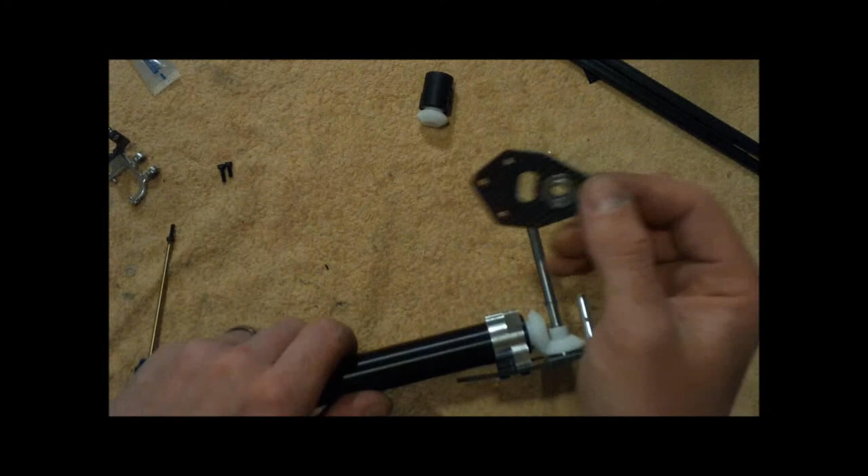Okay, now we've got it all set. I realized that my shims were actually the bigger outer diameter ones, and I'm going to need them over here. So once we've got the shims on there that we need, you may or may not need them yourself. You're going to grab this other little carbon fiber part, and this is going to go on the tail.

It's another little flanged bearing. So the largest part, the largest outer diameter, is going to go towards the outside, just like with the fin. So outer diameter towards the outside. So make sure you slide this on here exactly how you're supposed to.

And then on the right side, we're going to make sure we use this little part, and we use some 10mm screws to screw through here, and we're going into metal, so thread lock, and then an 8mm screw to screw in the back part, and then we'll have the tail case assembly basically put together right there. But just like it says in the manual, the flange bearing is already on, so yeah, 3x8 in the back and the 3x10 in the front.

So just follow these, and then in the end you'll have this.

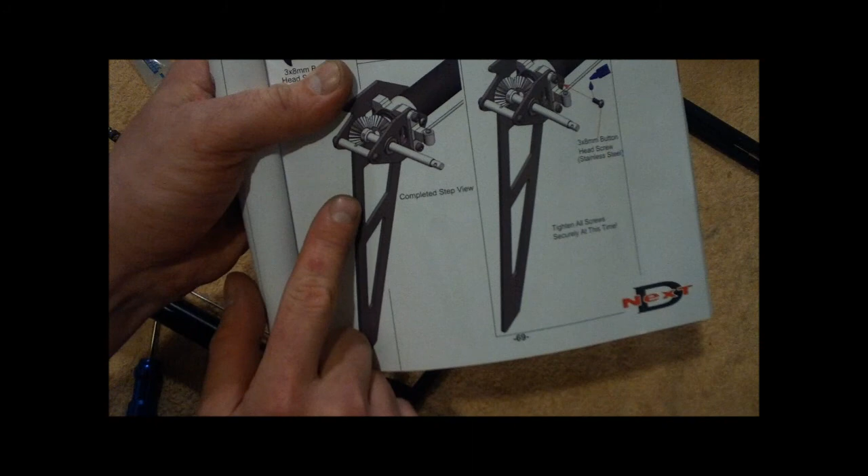Okay, we've got the tail gear assembly finished off. To top it off, once we've got these 10mm screws, 8mm in the back, there's another little stainless steel button head screw, 8mm. Put that in there, screw it in with thread lock because you're going metal into metal, and make sure you get that 10mm 3x10 screw in here with thread lock, get it nice and tight and secure. Don't kill it, clamp it down and give it a good tight fastening. But with any of these, you don't want to strip them and cause problems that prevent you from removing this stuff later when you have to. So there we go with that.

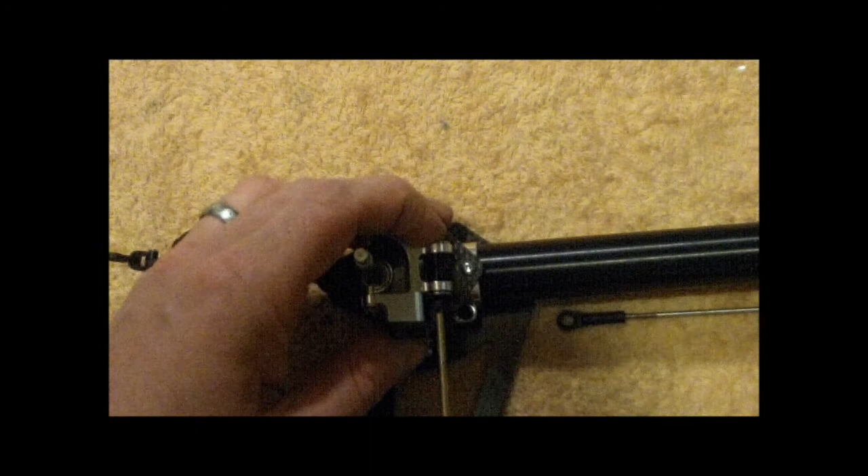Moving on to the next part, we are going to put this little rear bell crank on here, and then put the tail pitch slider on, making sure we engage the pins into the little slider ring as we put that on. So again, some thread lock onto some 3x8 millimeter screws. We just screw into this, not gonna get that tight just yet, screw into the top for now.

And then make sure we apply a little bit of Tri-Flow or some sort of oil onto the shaft, just a nice thin layer of that oil. Get that in there before we put the tail pitch slider on it, and make sure the arms are facing towards the outside. Put the slider on there and engage the pins as you slide it down, just like that.

Okay, so once it's on there, once we get everything tightened, it should be nice and loose, and then we can loosen up the pins a little bit if we have to, if it's too tight, and then we'll get it sliding nice and smooth. So for now, this is what it looks like. We'll get everything tightened, and then we'll come back and show you the next part.

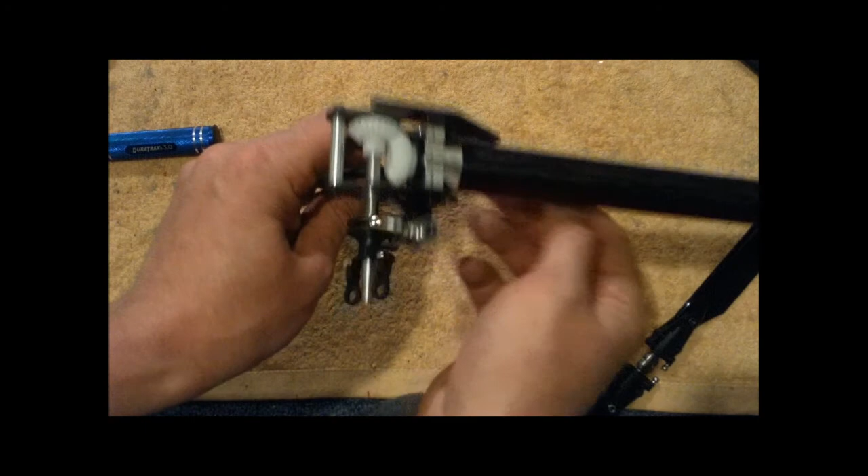And what we're going to do next is put the tail fins on to finish up this part. Check out the manual, make sure you do it correctly. There's a couple of 4x4 grub screws, a couple little indentations here. You can see the indentations, and you're going to want to line that up with the holes when you put this on, then use the grub screws with some thread lock, and make sure the leading edge is set up so it goes counterclockwise. It's going to go this way, so make sure the edge of the blade is in the front and the ball links are in the back.

So I'm going to go get the grub screws, put them on there, and then we're going to tighten the tail pitch slider. Just push it onto the ball links here, and then we'll pretty much have the tail set up and ready to go.

Okay, here we go, the tail gear assembly is finished. We've got the 2 set screws done, we've got the ball links all set. There's a little indentation on one side - make sure you get that nice and tight, and then get the other side. Again, don't forget to use thread lock, you're going into metal. And make sure everything's still moving nice and smooth. So there we go with that. We can now move on to the next step.

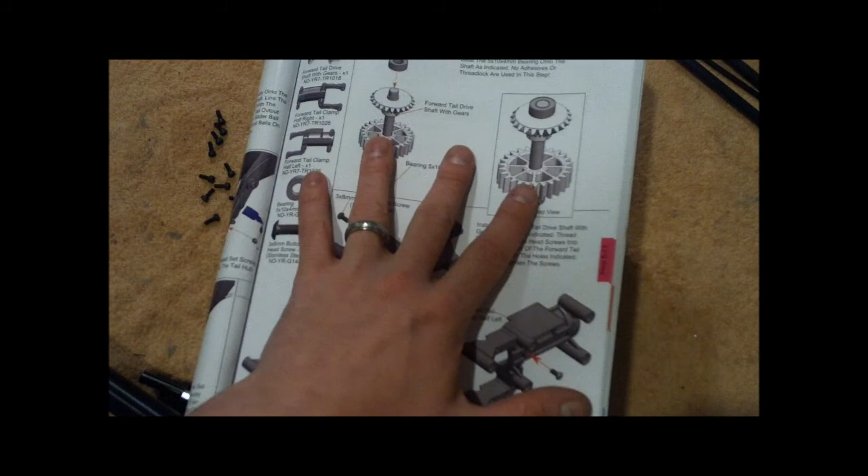Okay, the next step here, part 514, is pretty much already done for you. The block that ends up holding the front of the tail boom and that whole setup - the bearings are in there, the torque tube gears are in there. If you have some play in your setup, there are washers you could use to get rid of that play, but mine was perfect the way it was set up. Nothing's moving up or down. You're going to have to open it up so that you can get the tail boom in there.

Also, the other torque tube, put it in the front the same way you put it in the back. Line up the holes - it really only goes in there one way. Slide it in there, and then once it's in, you can clamp this shut, and then you've got this whole thing set up to put the necessary screws in the side here and make sure all of this is secure, and then you can start putting it in the frame.

And then there's a bunch of these 3x8 screws that are going to be going into the frame, into these little hex bolts, which are already placed in there conveniently for us. So you're, again, metal into metal, you know what to do. There's 12 of them, 6 on each side. We'll come back once we've got this thing finished and put together, and we'll show you putting it into the frame.

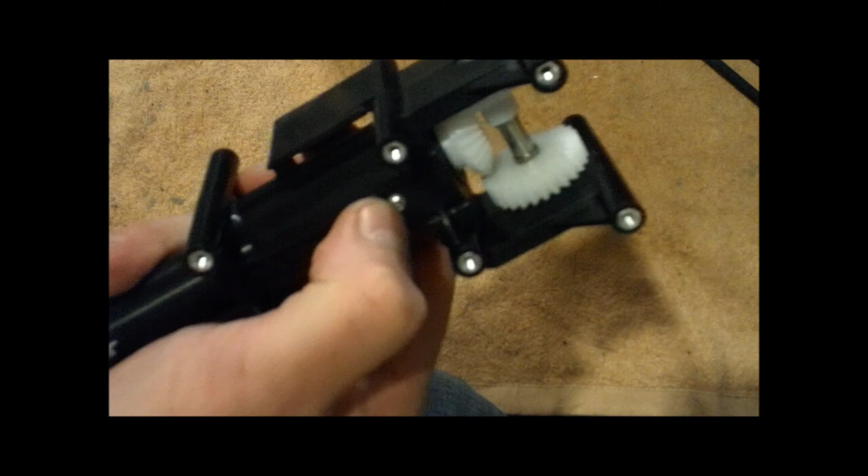Okay, now I've got the whole tail assembly completely set up and ready to go. I've got these little stainless steel button head screws to put in here, and make sure, as you're putting it on, you're lining up the holes, because it's the second hole on here that this is going to end up screwing into. If you're screwing into it and you find that these blocks are just separating, then you're probably not lined up with the hole. You got to make sure you're lined up with the hole and hold it nice and tight when you screw it. When it starts kind of compressing more when you're screwing it in, you know you're screwing it into the right place.

Also on the other side, there's 2 of these. This is basically doing the whole pinning of the boom, 2 sides. Looks really good, holds nice and strong. This is ready to go. I'm not going to put it on the frame yet - right now I'm going to just put it to the side, and we'll put it on the frame later after I finish up putting together the servos and all that stuff, because for me it's actually just going to be a little bit simpler to go through and get all the servo stuff finished up. So I'll be moving on to that part next, and we're actually done with the tail for now.

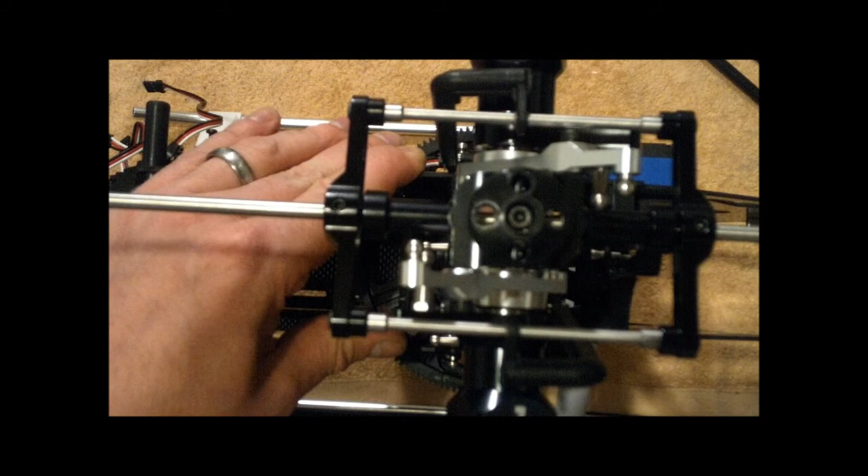Okay, getting to the servos and setting up the radio. I'm not going to go too in-depth on the radio setup. I'm using a DX7, and it's a 120 ccpm setup, and that's pretty simple and straightforward. This build is kind of more about the helicopter. If you want to see a video on setting up a DX7, I did one on an Align - basic, simple, same concepts. If you need to learn about radio programming, you can see on my channel how to set up a DX7, which is what I'm going to be doing with this one.

Right now I'm just going to talk about what I'll be doing here on all of the servos. It mentions, when it comes time to setting up the servos, the arms on the elevators are going to be about 13.5 millimeters out. Make sure you're doing that correctly, that you're hooking up to the receiver the way you're supposed to, that your gyro and your rudder are all set up correctly. If you have any questions, I have some videos on how to do an Align, a Spartan, and a Mini G gyro on my channel. Just make sure that you've got the speed matched for your rudder servo before you plug it in, or you might end up damaging your rudder servo.

Just measure all the linkages out to the lengths that it requires. For the servo horns, we're going to be screwing the balls, and it'll be having the balls facing the inside, the part that you're going to be putting on the servo. So when you put it on, the ball links are going to be inside towards the servo. Same with the elevator servo. Just make sure you're measuring up to the specs on the linkage rods, and you do that all the way around. You're using your calipers, making sure everything measures correctly, that these little things are level and even, and everything at 50-50 is exactly the way it's supposed to be.

One thing that's really convenient about this helicopter when it comes to radio setup, there's these holes here on the arms. What you can do is put a hex screw through them to line it up, and that's how you know you're 50-50 or 90 degrees. You want to make sure that when you're 50-50 on your radio, everything's 90 degrees - the basic setup. But there's also these holes that can hold things in place to help guide you along the way.

So I'm going to do the radio setup, and then I'll come back and update and show you the frame before I put the boom in, and we'll just make sure the swash plate is moving the way we want it to, and everything is working as expected. So go ahead and set up your radio. If you have any specific questions, go ahead and put it on my channel.

But this is pretty simple and straightforward. It's about measuring ball links to size. We're going to measure the ball links up here on the top to the specifications that it requires for the head. There's a couple more ball links that we need up here, linkage rods to finish up the head, and the complete swash plate and mixing arms. So we're going to just do that as well. So this is the fun part. It'll take a little bit of time, but it's pretty simple and straightforward.

Okay, now I've got all the radio gear set up the way it's supposed to be, and all the linkages on the top and everything. Just for that step, make sure for the top we measured out this one with 5.6 millimeters in between. Whole thing is 33. That goes to the blade grip and the Flybar cage seesaw mixing arm.

And then you measure this one out here. It's the longest rod, and it's going to be 75 millimeters in the middle, 118 between the two holes, and that goes right here on the longest section down to the swash plate. So that finishes up the head.

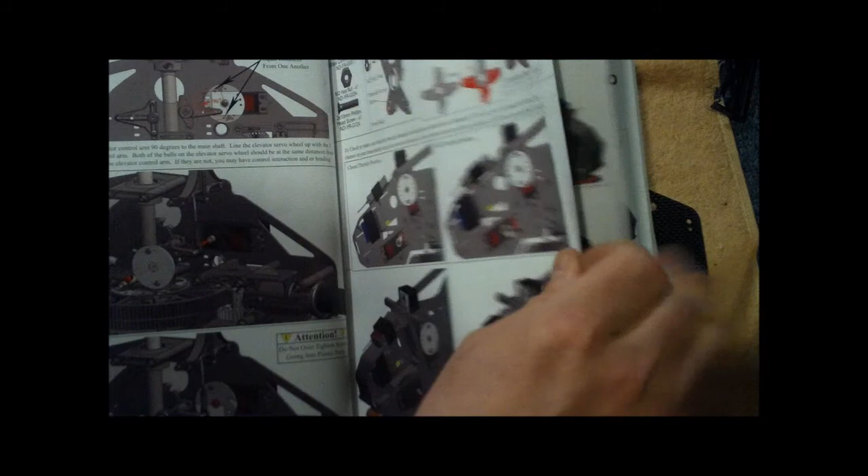Let's see, like I said, the ailerons, those servos are going to be a good little 90 degrees, and you're going to be able to utilize this hole here in the aileron arm, put a little driver through, and you can use that to hold it into place. You just want to use that hole to try to look through if you're adding a little sub trim or something, just to make sure it's lined up, and then to double check it, put it through. Don't put the hex driver through and then try to turn on your radio when it's not set up correctly yet, because then you might overdrive your servo and create some problems for yourself.

Measured out this little tail control rod with this carbon piece. Made sure we use some long ball links on there.

Okay, let's see, next one. Right here. Now this is what you have to be aware of. I put my mixing arm in a spot where it was supposed to be set up for the 140 degree, but I'm doing 120, so I had to move this, and now it's on the third hole, which is closest to this big hole here, instead of the hole that's closest to the center of the frame. And that means that bracket there, I ended up using 3x8 to hold the bottom part of that brace that we put in there, and then we moved and we ended up using these M3 plastic locking nuts on the mixing arm to hold those in place.

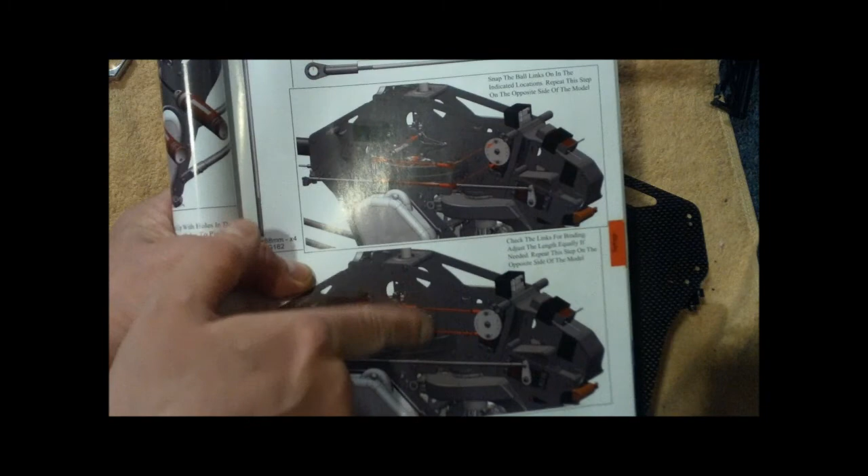So for the 120, you measure out these long rods. You're going to end up building 4 of them with the 70.5. I am doing the 120 CCPM, so this is my setup right here. This aileron mixing arm is going to be on the hole that's closest to the front. I measured out 4 of these 34.5 millimeter rods, put them on the front and back. I had to back it out one turn for each side to make sure my servos weren't buzzing horribly when I put them on there. They still buzz a little bit, but nothing too bad.

And then you measure out 2 more of these with the 53 millimeters to control the swash plate. Once you've got everything leveled and your servo set up, you put it on there and do all your swash reversing and your swash mix and everything you need to.

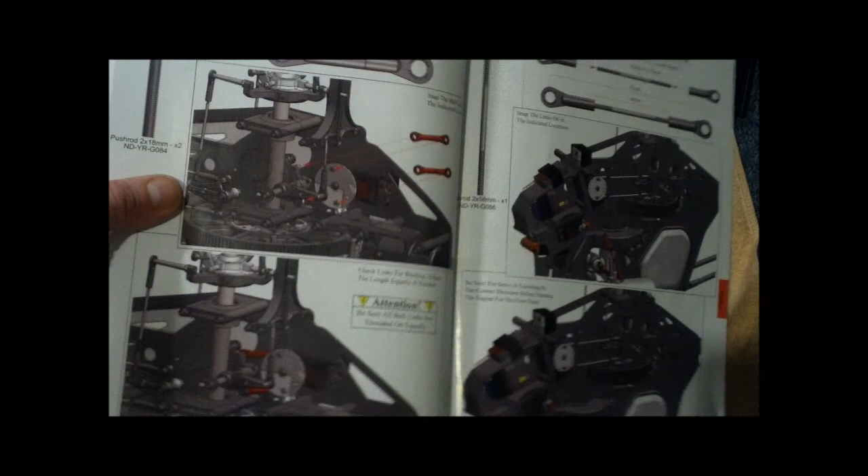For the aileron servo, 120 and 140, it's going to be the same. You're going to have a long ball link and a short ball link, and you're going to put them together on the short threaded part, making sure there's no gap between the small and the large. It'll be basically about to size. I didn't have any problems with my lengths over there.

Then finally, take this thing out. Still got the electronics needing wired a little bit. And then I also added this little rod that goes to the tail. You want to make sure in the back that when it's centered, this little thing is set up at a nice 90 degrees right there. Then when we put the tail boom on, we'll click it on here and have control of the tail.

So, same setup as most helicopters. 90-degree angles are your friend. You want to make sure that the swash plate is level. If you have to do some trimming to make sure it's level, just make sure it's perfectly level and you've got 90 degrees all the way around. Everything's nice and level.

I had to adjust the links. I had to go out one turn on this one and then two turns on the longer one to make sure that my grips were nice and level at 50-50.

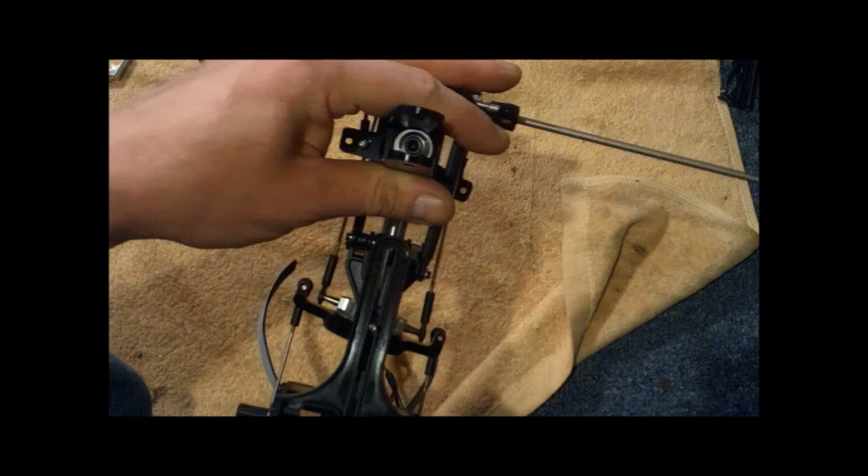It's also set up so that as the swash plate goes down, the pitch goes up, and as the swash plate goes up, the pitch goes down. So if you're used to the swash plate going up to give you positive pitch, this is the opposite. Make sure you know what you're doing so that when you're giving plus on the throttle, the swash plate is going down and you're getting positive pitch.

That's what you want. One more thing to be aware of: when I was checking out my swash plate and my aileron, I had a zip tie in this hole down here that I was using to hold the elevator servo wire, and the end of the zip tie was actually getting hit by this ball link, keeping my aileron from going completely to the right. So make sure you don't have any pieces sticking out, like from zip ties, that could cause mechanical issues or binding. Watch out for those 2 zip tie holes, and make sure it's not hitting your arm as it's going down.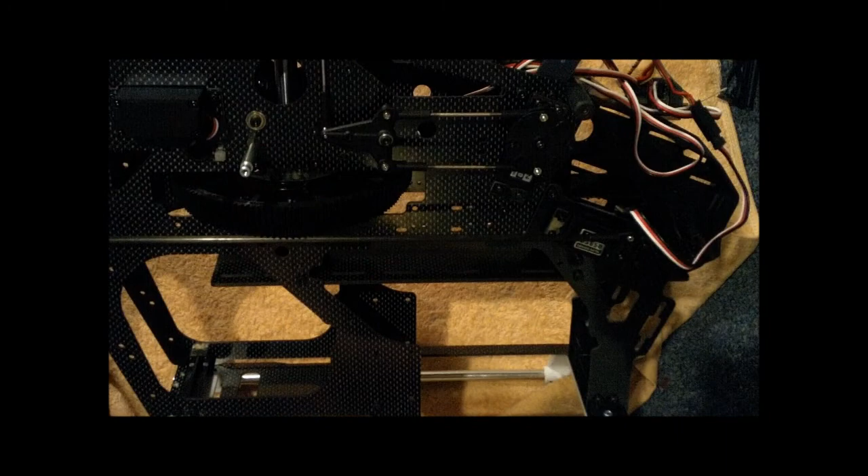So same as usual: swash plate moves forward when you want to go forward, back, left, right on the aileron, doing exactly what you want. So now we've got the frame set up. Everything's in the radio, everything's level, everything's perfect. We've got 90 degrees, and we're ready to put the tail on the frame and move on.

Okay, now that we've got all the radio stuff set up, we're going to put the tail onto the main frame and turn it into a whole helicopter at this point. So make sure we've got all 12 of these 3x8 cap screws, and we've put thread lock on them. All of the hex bolts are in here, make sure none of them slipped out.

We're going to slide it in there. There's a couple holes on the frame, you can see it lines up. Make sure you get it in there, line it up with the holes, make sure the gears are together, tighten both sides, get it a little loose to start out, and then go back and start cross tightening all of the bolts after that. When you're done, you'll have the completed setup right here.

So I'm going to get my screws ready, pre-threaded. I'll put this in here, and we'll come back and update and start putting on the boom supports.

Right now we have the boom on the frame, and we've got all of the screws nice and tight, just like it says up here. Moved on to the next part.

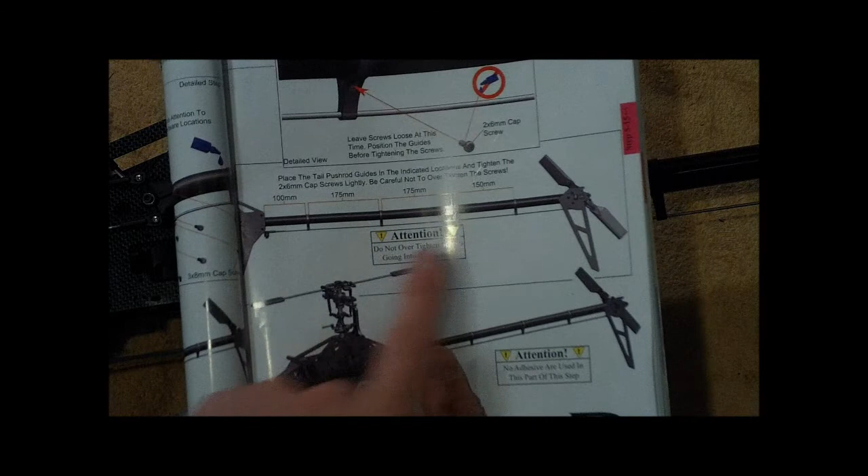Putting the guides in the correct spots. It says you're supposed to measure them out 100 millimeters, 175, 175, and then 150 with the gap in between them. So what I did was use my calipers for 100. It didn't go out too far on my calipers, so I just went another 100, and then slid the guide over, and then went an extra 75, and slid it back out. Then I had 75, so I went 75, opened it up to 100, and slid it back out. So I had the 175 total, and then did the same thing here, 100 and an extra 50, and got them lined up perfectly.

Before you do that, you can put the little 2x6mm screws in there, in the guides. Make sure you come in on the side that has the gap. One of mine did not want to tighten enough to clamp it down, so I used a little bit of CA to get it to stay in place. It was pretty tight, but not as tight as I wanted, and it wasn't going in any further. The rest of mine did fine.

Measured those out, and then what I did was tighten these ball links on the tail push rod pretty tight. I had to go about as tight as all the other linkages. Just tighten it and make sure you've got it set up so that...

When it's at 90 degrees here on this little slider, the tail is basically right here in the middle of the slider. Depending on your gyro, it might want some different configurations, but middle of the slider and 90 degrees right here is what you want. So that's what we've got here. That's set up, did lots of tightening on this to make sure it was right, and then measured these out. These are tight now, and they're all in the exact locations that we want them.

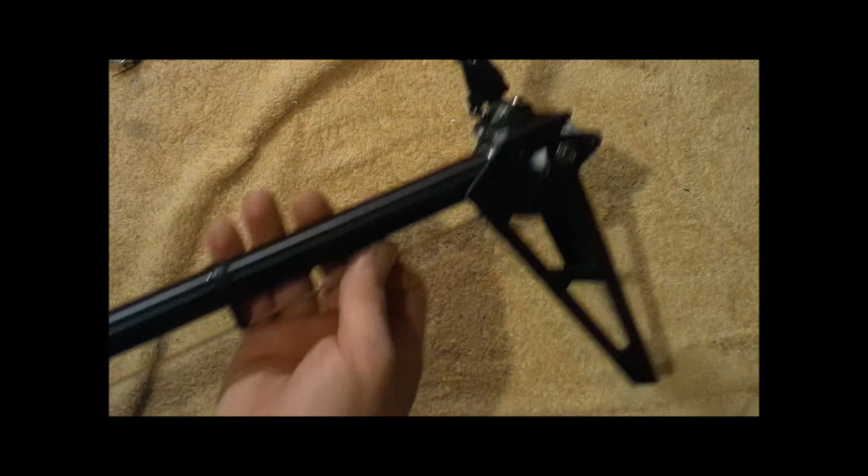These little guides - also look from underneath, make sure it's straight, and look from the rear of the helicopter and down the boom, making sure those are as straight as you can get them. Get these guys all lined up and make sure you can do a 90 degree look here with the bell crank arm, and then it goes just straight out, and comes straight out of this part as well at 90 degrees.

So that's the helicopter with the tail on. Now we will finally go and put together the support rods. Put these on here. It shows in the manual how to put these together, but as you can see, they are already put together in the factory. So we will put on those rods, use this part to put on the stabilizer, and then we have the carbon stabilizer plus a couple spacers and extra little carbon supports that we're going to be using as well. So get all that stuff together, and we'll come and look at how to put those on.

Alright, now we're going to put together the rest of all of the tail hardware. So you want to get all this stuff together. We've got this last little M3 nut, 2 little spacers here. We've got like 6 of these M3 washers, the stabilizer mount, all the carbon stabilizers, extra frame supports. I'm actually going to have to pull 2 screws out on the bottom that I've already placed in there to get those in place. The screws that are going to go here, but it'll be worth it for the extra frame support. And then the tail boom support stuff right there, and we'll show how to put all this stuff together.

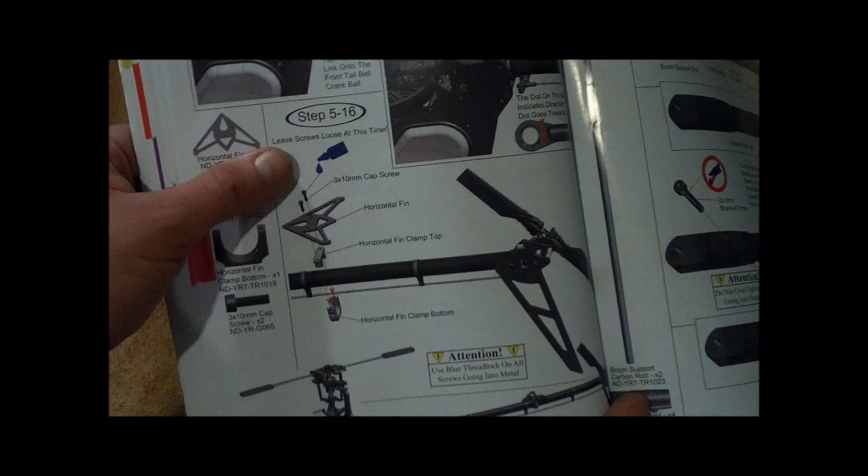There's also 3 of these 3x10 washers. Make sure you clean them out. What we're going to do is put the horizontal fin clamp here, this metal part, and then the horizontal fin. Use some 3x10 cap screws with thread lock in there, and we're just going to kind of have it loose right now so we can slide it and adjust it once we put the support rods on there. Support rods are done and ready to go.

Next part, we've pulled out these little spacers. There's some washers here, so there's 2 there. A couple washers are going to go into the back of the support rods, and then a couple washers that are going to go into this little part that ends up supporting the tail boom supports. And they're all held in by 3x18s.

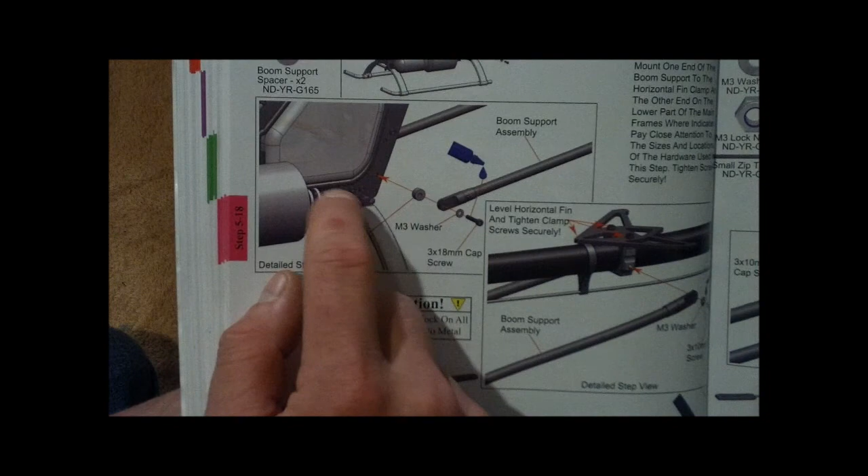So exactly what we're going to do, follow along here. After we get the horizontal support fin on there, make sure we've got the washers in place. It's going to be a 3x18 cap screw here, a pretty long one in the kit. Screw in here, washer through the tail boom support, hit the spacer, and I'm also going to make sure I put the frame support, that little extra piece of carbon right here, while I'm in the process.

So once we've got that, we do that on both sides, and then we'll come and show how to get this little thing on here.

Okay, now we've got all the tail boom supports on here. This little extra frame brace, this carbon fiber piece, made sure I pulled all these bolts out for holding this part back here. Remember when we cut the little plastic frame brace for the middle part down here? Well, the other half of it we're going to use in between here. It says in the manual just to use a little hex thing, but I put it in the plastic because I had it. Adds a little extra rigidity to it.

So run that 18mm screw, make sure you go through the washer, and then through the boom support, and then through this little spacer right here. And then through the spacer, you're going into this brace that you still got left over. Do that on both sides.

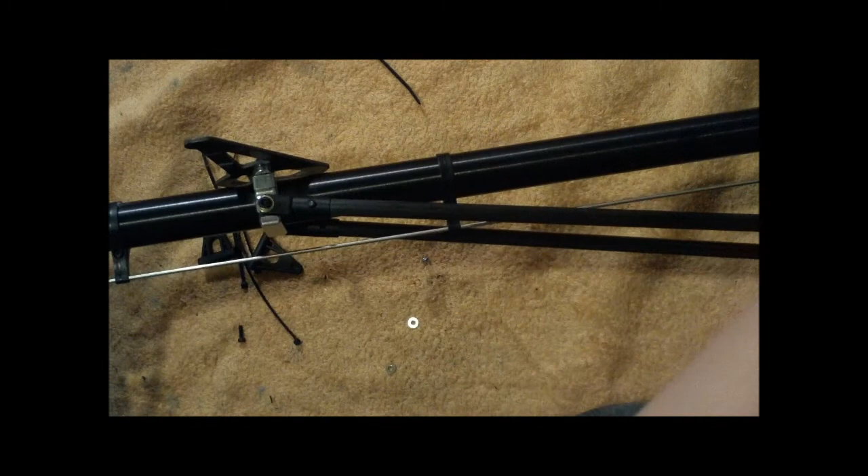And then on the back of the helicopter, we have the horizontal stabilizer. We've got a 10mm, again we ran that in here through the washer, get it nice and tight. Don't forget thread lock. For the stabilizer, you don't want to over crank it. Don't strong arm it and end up compressing your boom, you can create problems that way. So I just look down the bottom, make sure it's level with everything else, and then just kind of go back and forth and tighten it.

And once you've got that together, now we can move on to this little part that we're going to put on the boom.

Okay, now for this part right here, what you do is just sandwich the little pieces together. Make sure you use the washers when you go in there. Come in with the 3x10, use the washer on the other side. You don't need thread lock because you've got an M3 nut right here. You're going to have it loose to start out, so it's kind of going in and out.

We're going to put it here on the boom. Okay, so it slides in and out here. So what we're going to do is put it here on the boom. Start down low, because that's where you can get it in, and start moving it up. I like to have it about here.

And then if it's nice and loose, you can kind of get it to where you stretch it out and clamp it nice and firm onto the supports. Once you've got it where you need it, you can tighten this, hold the screw, or use a needle nose plier to hold the nut and get it nice and tight. Then you're going to run zip ties all the way around. There's little holes, you run zip tie in there, 2 on each side, and get it nice and firm so that it's holding the boom supports in place.

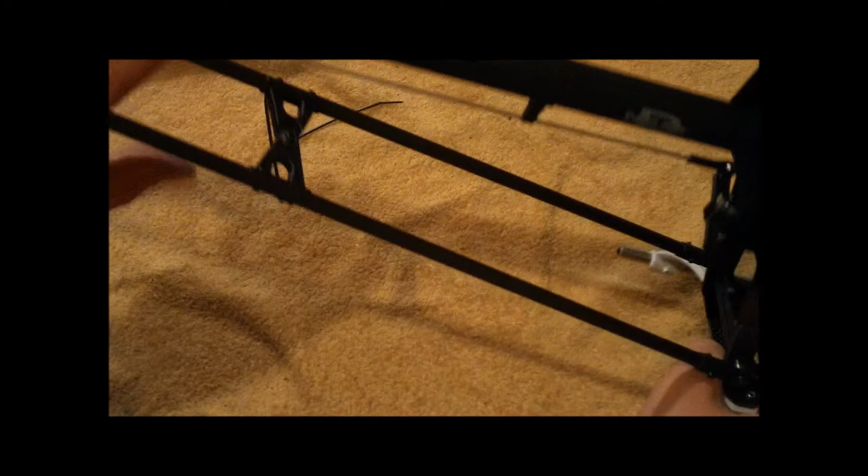Okay, now we've almost got the frame completely finished. We've got all the tail boom supports on here, all the supports and the guides for the tail push rod. Everything's 90 degrees as it should be on the tail, on the head. The frame is pretty much finished and put together, and everything is looking good.

Now we're going to move on to getting the motor and everything set up, getting the ESC put where we want to put it, and then we'll move on to wiring. So next we're going to start moving on to the motor electronics and talk about the specifics of what you're going to be doing there for an electric setup.

Okay, now we're going to talk about the motor mounting and everything for the electric setup. It's kind of a clever little setup here. You've got this little part, we've got an M3 lock nut washer, and we're going to put that in here because that's going to end up connecting with this unit here.

You may think that your pinion was too long, but don't worry, it's not. Once these two clamp together, your pinion's going to be just the perfect size. So you're going to put this in here and use an M3 washer in here with a 3x10 screw, and we're going to screw that in there to put this part together. But first I want to show you something with the motor.

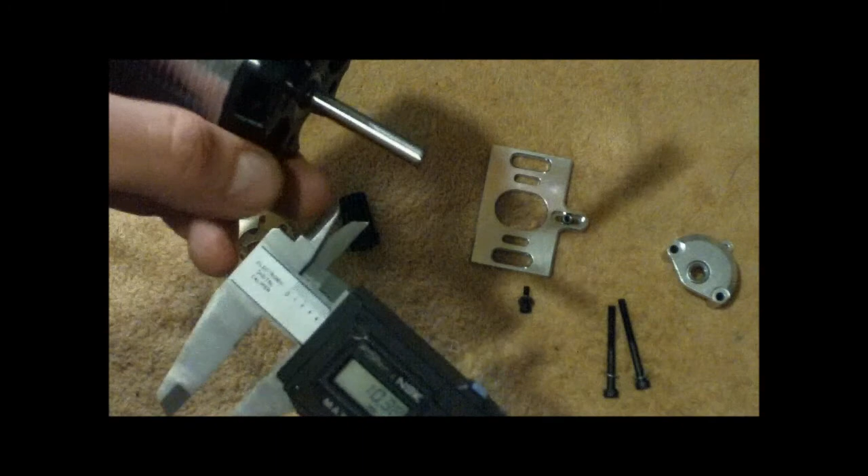Depending on the motor you have, different motors have different size shafts, and if your shaft is between 21 and 33 millimeters long, what you're going to have to do is take the shaft out, get to a lathe, and cut the shaft down to 21 millimeters. If we look at the motor I have here, my shaft comes out to 35 millimeters, so well over 33. So I definitely don't have to worry about that.

If it's shorter than 33, what you're going to have to do is, see this little thing, this pinion here, you're going to put that in with the washer, and then put that through the bearing in this part, and you'll have this little piece sticking out. Then when you put the pinion on, the shaft is going to end up meeting up with this part, and the 21 millimeters will fill this part. But since mine is long enough, I don't need this part. I can pull this out because the end of the shaft will end up going long enough so that it can go in there. So make sure you know the length of your shaft and whether or not you're going to have to use this little piece right here.

But you are going to have to make sure you use this washer. So just like it says in the manual, I'm going to put this together, and then we'll start putting the pinion on there. You've got these long screws to hold it in place. Make sure you use thread lock. There's also these spacers if your shaft is too long or the pinion is too long and you need an extra spacer. They've got these here that you can use as well.

Alright, so I'll show you the final motor mount configuration here. I ended up having a space in between here, so I ended up using just one of these little spacers. That's all I needed for this configuration. The screws provided went through, and they're not going down too far. Everything's moving nice and smooth, so that worked out.

Make sure you've got your washer in there. It says to make this part in the center of this whole thing, so I looked inside and was able to see that they were lined up in the center, then tighten this guy with the M3 lock nut, and make sure everything's moving nice and free. Make sure your shaft is going through here, and again, if your shaft is too short, you may have to cut it to 21 millimeters and use this little extra pinion piece. So there we are, we're ready to go.

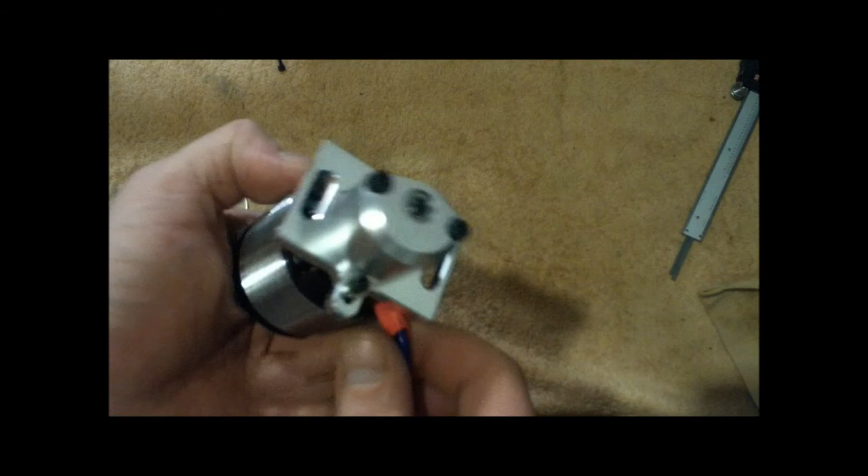You also want to make sure you run the wires towards the back of where the face is, because the face is going to be towards the gear, so this will all go towards the front where everything is at. So this is all ready to go inside the helicopter, and we'll come back and show how to mount this.

Okay, I've gone and got my ESC programmed. I'm using a Castle Creations HV120. Got it all programmed, got my endpoints ready to go. It's all set up, and it's mounted on here still, like we said.

Next thing it says in the manual, you're going to want to slide the motor in here and line it up with these holes here on the bottom. You can see we're going to end up having it like this, but it's a little bit slotted, so you can move it forward and back for gear mesh. We're also using 3x10 screws with M3 washers, so make sure you have your screws and washers ready in there. They've got their thread lock on them.

This motor mount slides in here nice and smooth, so you don't even have to separate the frames or anything. Just make sure you're not getting in the way of any of your wires. It's machined just perfectly, it slides in there, and there's still no play.

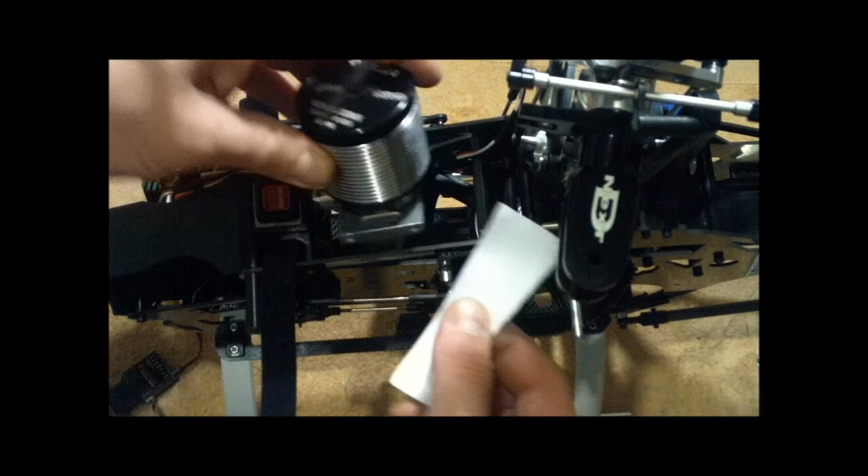It gets nice and level, and then you get in there, get the gear mesh the way you want it to be, line it up with the holes, and slide it forward and back to make sure the gear mesh is what you want. What I'm going to do is put a little piece of paper in here, push it as hard as I can, and then tighten it, then move it and get the piece of paper out, because that's usually the best way to get the perfect gear mesh. So I'm going to do that, get the motor mounted in here, and then come show you how it's looking when we're all finished.

And once we've got that all done, we can start getting all the electronics organized.

Okay, now we've got the motor mounted in here. We've got the mesh set up exactly how we wanted it, using our sheet of paper. You didn't even have to hold it in when you put the motor in. You could just put it in, set it nice and loose, cut a piece of paper to the right size, feed it in there and through, then tighten it up and get the mesh nice and perfect.

Check it out, make sure everything's moving mechanically as it's supposed to. I ended up also running most of my wires up here to the front. Pretty simple setup, didn't take too much work. I put my receiver here on the right on this little flat spot, my gyro up here, and I'm going to put my ESC right here. We'll see, I might end up moving it over here. We're going to check out what happens with the batteries and how easy it is for me to access that stuff.

So we're just about done. We've got this whole frame together, motor's mounted, mesh is perfect, head is set up, tail is on, tail is perfect. I've got the gyro programmed, and if you've got any questions on programming the gyro, I've got how to program a couple of them. I've got a Spartan, an iKON, and a Mini G done on my channel.

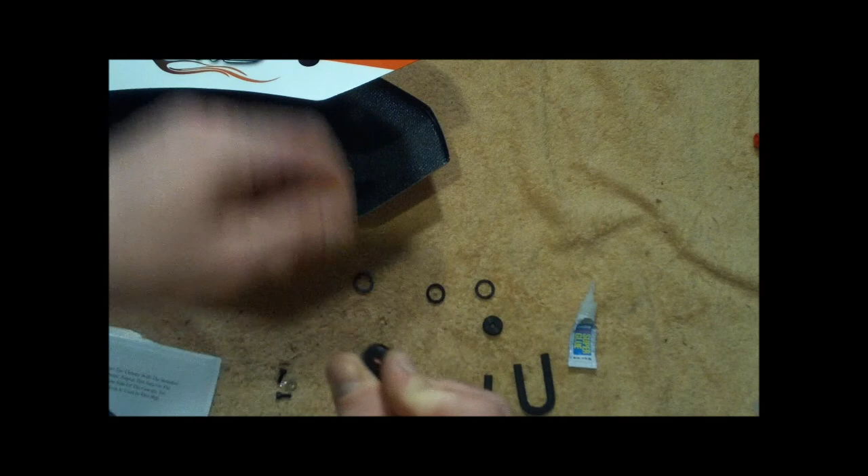This is always kind of a tricky part, it's a bit of a pain. You kind of got to get one side in there and try to get as much as you can through, and then slowly work it through and pull it out the other end. It's all about just kind of working it in slowly, it's never a piece of cake, but that's the way to do it. And then these little U-shape are going to go on the bottom part here.

You're going to get them glued on there nice and tight, and they're going to make sure that it doesn't rub up against the main shaft or the main frame.

What I've heard of some other people doing is there's also where the standoffs are inside of here, putting a little piece of glue or something for the spot where the little standoff rubs up against the canopy. Sometimes people put glue in those. So I'm going to see where that happens, and I might put glue in there.

But for now, I'm just going to put these little parts on here, follow what it says here in the manual - these little U-shaped parts right here. Make sure you use the CA on the plastic parts, then the rubber grommets. And in order to put it on the helicopter, we're going to use, without thread lock, the M3 washer and a 3x8 cap screw when we put it on. And then we'll have almost the finished product.